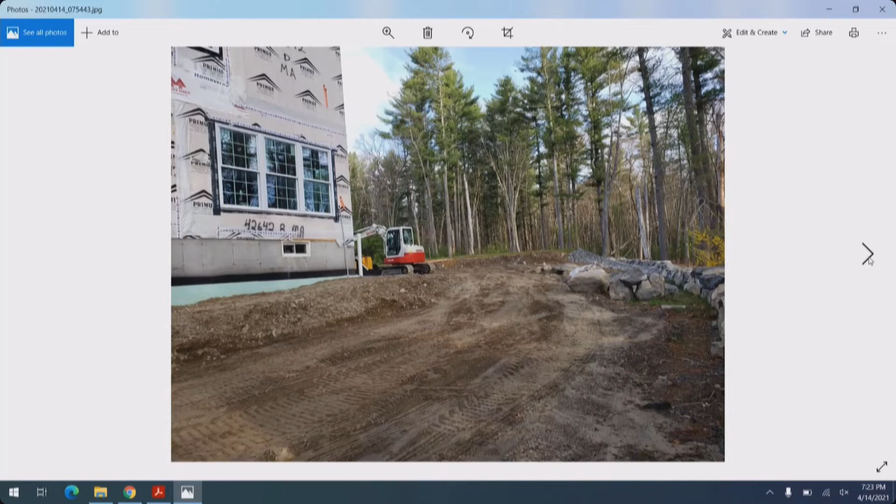I feel badly, but I think they need to get a good wetland scientist to give them an alternatives analysis on what it is they want to do. Jack? Yeah, I agree with a lot of what you guys said.

I mean, all of it, actually, especially the gas line. The patio and deck above the patio, you know, most of it being in the 75-foot no-build zone, that's got to be justified. The retaining walls out front, and especially looking at that picture, I don't see how they can get around those.

Those are out, though, out of the 75. The retaining walls and walkways are out of the 75. Oh, it looked like, maybe I misunderstood the plan, that they were shaded in gray. Can you go to the rear shot, the rear elevation - this one, if you don't mind? That's the front. There we go, that one's the best shot.

So they kind of got themselves in a pickle with the floor plan they picked, and got to the extent of building - it's not just a foundation, they've gotten to where they're at. So they've kind of hung their hat out there on getting a deck and a patio. At the absolute best they're gonna get - I'm not sure they're going to - but the absolute best is gonna be a deck and a rear stairway off the door. They may not get a patio. But I think, if they're that close and not outside the 75 with no other alternative, we may not even allow the deck.

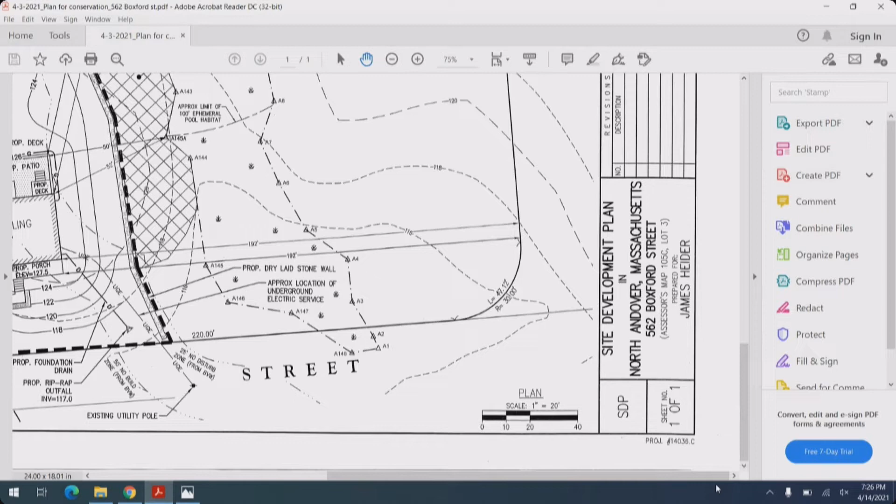He's an experienced engineer, he knows. All right, so why don't we... Christiansen and Sergi did the original, the first plan, and now Morin is on this plan. Now we have a second question. Is this still considered a modification or new filing?

So if that's the case, let's just simply say it's not a modification, let's deny the modification request. It's really not a modification. So do we want... that's a motion. I will second your motion for purpose of discussion.

Do we want, is Jim Heider or John Morin on the call with us? If anybody wants to get on the call with us now, that's fine, this is their hearing. Yes, this is Jim Heider, I'm here.

Hi, Jim, junior or senior? Actually, this is Jim Senior, and my son Jim Jr. is here as well. Okay, is John Morin on the call?

I don't believe he is. I'm not sure. That's okay. Jim, were you able to hear the discussion that we just had?

Yes, I did. First, thank you for taking the discussion to us tonight. And honestly, I wasn't aware of the original meetings and whatnot. My son purchased the house in hopes to put the new septic system in. Then we found out the house had to come down after we purchased it. And so we took the house down and put the new home in the approved area.

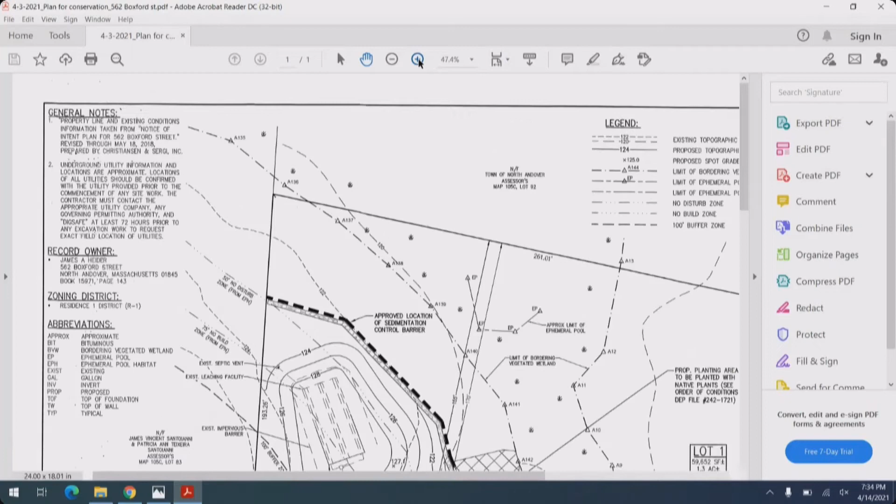That's the way I see it. I'm not usually inclined to be so liberal, but I recognize that a really robust alternatives analysis of the original application convinced us that the 52-foot setback made some sense in that one corner. We gave a permit, it must have made some sense. So I would say if we're looking at a patio or a deck, it can be no closer, absolutely no closer than 52. Al's saying no closer than 75, but I'm saying absolutely no closer than 52.

And if there's a way through their alternatives analysis they can justify that the deck is needed and it's elevated and therefore it's not very intrusive, that might be a valid argument, but the patio is gigantic. So I don't think there is an argument, other than I just want to have a really big patio. So I think in that instance you're probably—

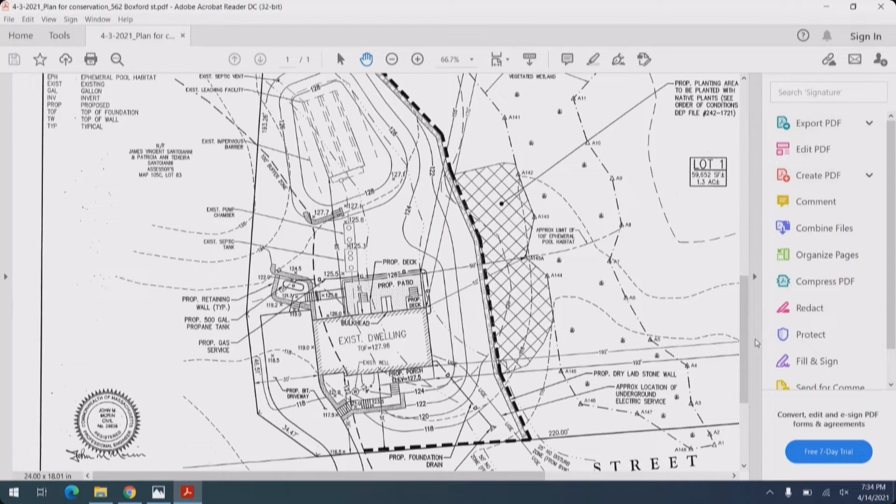And the patio is 50 feet setback. Yeah. So I think if I get 75 for the patio and the deck no closer than 52, that's middle ground I think John should explore, from my perspective. And I promise to keep an open mind. I do. I will keep an open mind.

So what are we asking them to do? An amendment, a new filing? An amendment, maybe. A modification, no. Possibly an amendment. I could live with an amendment. Jack, the alternatives analysis—well, that would come with it, yeah.

First we gotta give them the vehicle. How do we get to see what they filed for? How do they get that alternatives analysis to us? Through an amendment or through an NOI? Oh yeah, it has to have a way to get here. It's just a procedural question. I want to make sure, when you say amendment, it means abutter notification of a public hearing.

Reopen, yeah, we do. All right, good. This is, honestly, I'm sorry to do this, but no, it's fine, clearly not a modification. All right. But if they can get things as tight as possible, shrink that patio, get the porch out. Well, we're saying there's a way to make it permittable. We're not saying it's permittable yet. We're all offering our opinions and telling—okay. I said I'll keep an open mind, but that's John Morin's job.

The alternatives analysis has to be a good one. But silent in this discussion is the bulkhead, and I think that needs to be included in the discussion because it's an extension of the structure. There's no witness line of how far that is, but if it's 52 feet to the corner of the house, that bulkhead may not be 75 feet out, so that needs to be included. That may be tough to move if the foundation's poured.

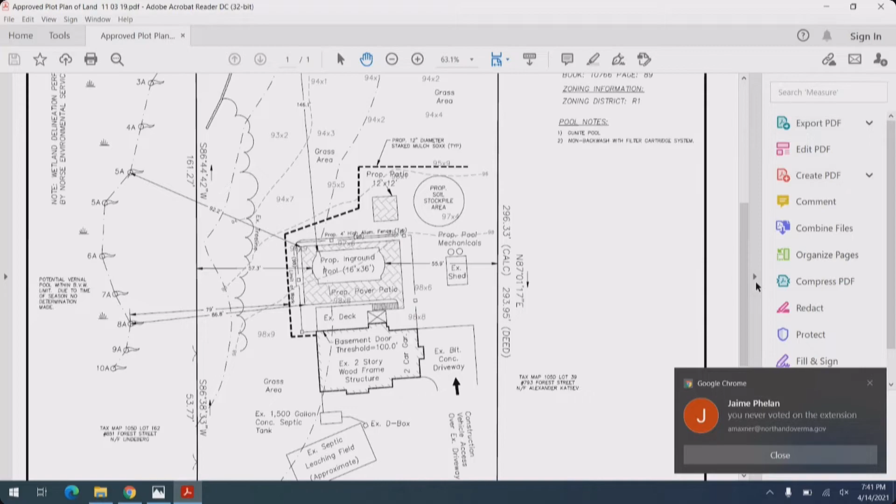Actually, can we just back up for a second? You never... I wrote it on, sorry, the extension. What's that now? Good job, Jaime. Thank you, Jaime. What did we not vote on?

The extension for 562 Boxford. In light of the fact that the existing order is going to expire prior to them probably filing the amendment, I move that we grant the one-year extension. Second. All those in favor say aye. Aye. Opposed? That's unanimous, thank you.

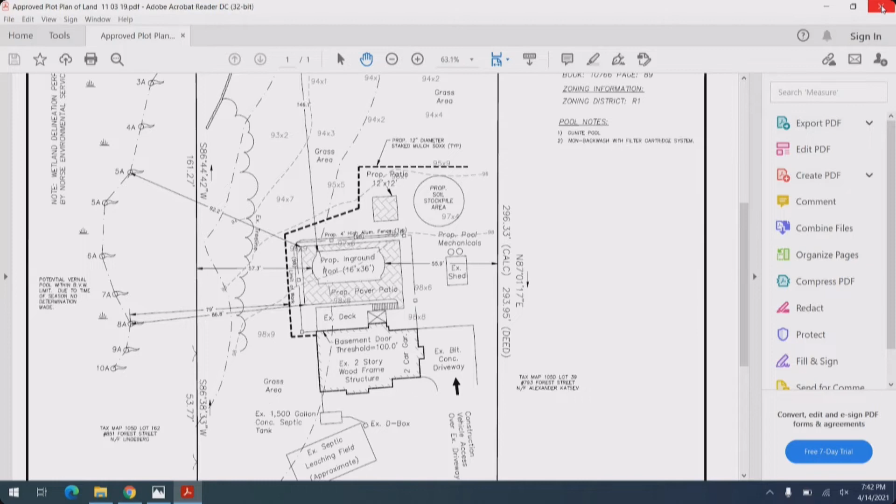Come as-built time, we found that the patio was expanded a little bit, up under the house. And the chain link fence was actually placed at the perimeter of the yard, so you can see that.

At the last meeting, the commission requested the applicant to go figure out whether this was a vernal pool or not. They hired Norse Environmental to do an investigation. They found 5 spring peeper egg masses and heard spring peeper and wood frog chorusing. So we have a vernal pool out there.

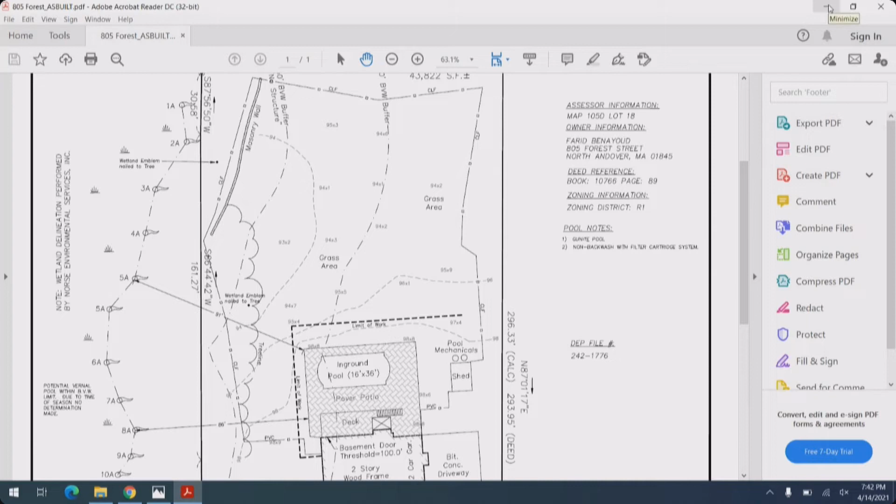I'll pull up her report. So we're at the point where we have a vernal pool with a chain link fence at the 25, which is in the 50-foot no disturb zone. Although part of the 50-foot no disturb zone is lawn.

So there's a chain link fence installed now at the 25? Not in it, but at it, inside the 50-foot, which is at the edge of lawn basically. Here's the pool - it's already installed. They want a certificate of compliance? Yes.

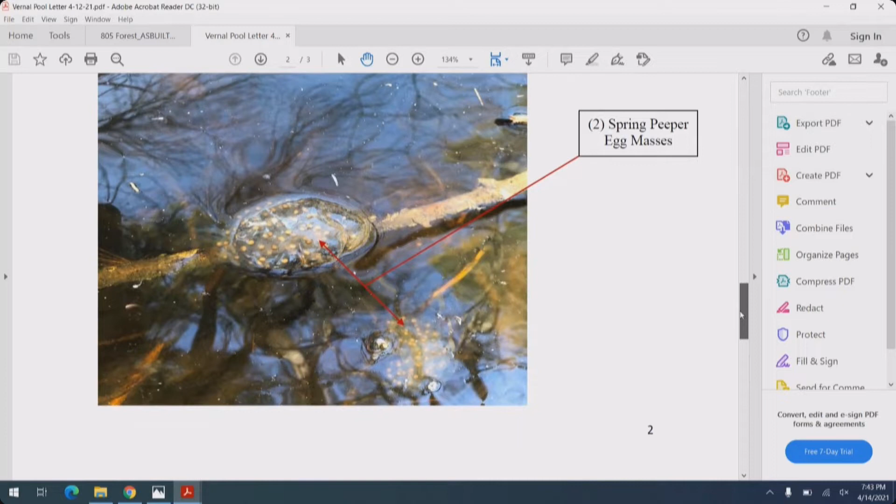Here's our spring peeper egg masses - that's pretty graphic right there. That's a great picture, actually.

Refresh my memory, because I want to make sure I get the sequence right. The original application was to build something which included the pool and the fence, and it was permitted with dimensions. Is this according to that plan, or is it not? It's different - the patio's a bit bigger, although most of it's out of the buffer, and some of it was in the buffer, expanded. And the fence was immediately around the patio.

So it was out of the 50, out of the 75. So is the pool itself in the correct location? Yes. The patio's a little bit bigger? Yes. So there was an originally permitted project that allowed it - the ephemeral pool was not as much of an issue back then.

Because it's not in compliance, they've got to build it in compliance with the order. The patio cut back and the fence goes around the patio, and everything else is in jurisdiction, and the ephemeral pool is sort of just another justification of why that's all appropriate. But the reality is, it's a certificate of compliance that they're asking for, and they're not in compliance, and they can't get a modification.

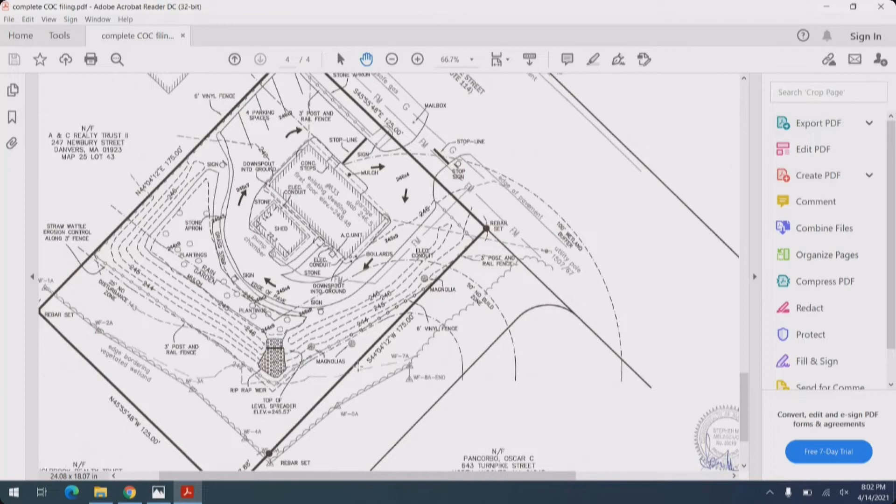Joe? No questions. Al? No questions. Jack? Motion? So moved. Second. All those in favor say aye. Aye. Opposed? That's unanimous. All set.

Next one is 628, partial COC request for 40 Meadowwood. This order was issued in November of 1992 and governed construction of an 18-lot subdivision and associated house lots. The Commission will recall issuing a partial certificate of compliance for 66 Meadowwood Road, and at that time we established that the roadway was accepted by the town and the drainage features were the town's responsibility.

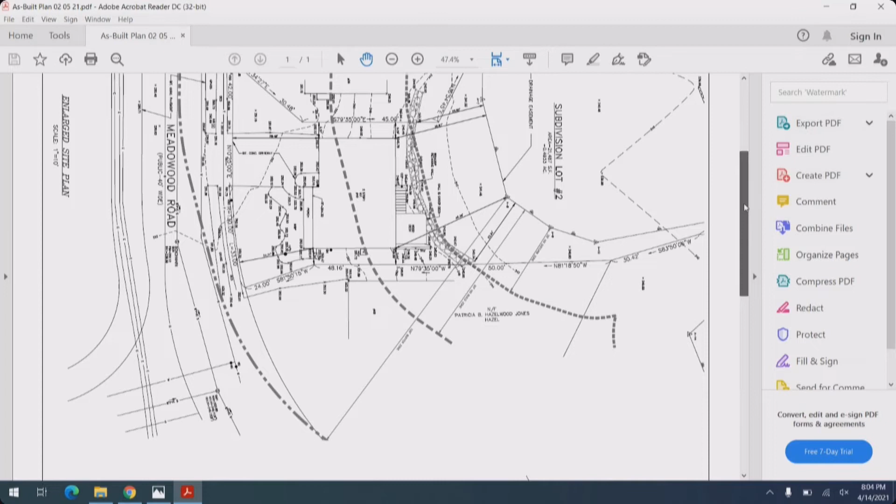This particular property has changed hands five times since 1993, and now this outstanding order is just now bubbling up, which happens. The certifying engineer notes that the rear retaining wall is located slightly into the 25-foot buffer in a couple of sections, but overall it maintains the 25. I conducted a site inspection and the site is totally stable. The retaining wall is stable, and I'm happy to report I didn't see any wetland violations back there, which I'm kind of surprised by, but things looked good. So other than a retaining wall that's been there since 1993 that's crept into the 25 a little bit - I don't know what you're gonna do about that now with the foundations and everything in - I don't have any issues with recommending issuing a partial certificate of compliance.

Joe: The barrier wall, is that made out of real rocks, or pebbles? It's rocks - no, it's boulders. All right, I'm all set then.

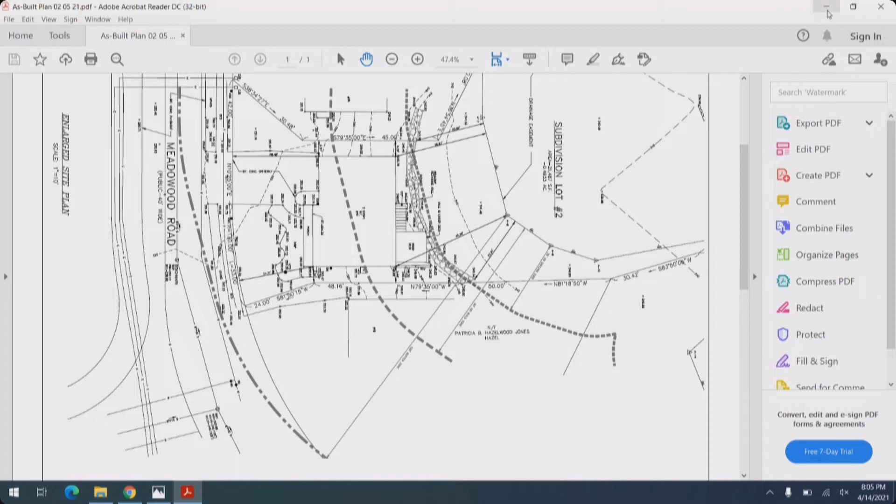Like I said, I saw all the plans here anyways. Well, I can give you some pictures. It's not that invasive to worry about, it's just that little bit of a corner.

This was a subdivision where we had to define a wall. Yeah, I know, this was one of those projects we paid our dues on. This was the first cluster, wasn't it? I don't know where it fell. It was the first time anybody had constructed a wall out of 1-inch pea stone. Right, but we called it a wall. But it was the first cluster zoned - first cluster in town. Oh, I see what you're saying. Yes, it was. No, I know it was a cluster.

In many ways, I have no questions. All right, Jack? I'm good. Motion? We grant a partial certificate of compliance for 40 Meadowwood. Second. All those in favor say aye. Aye. Opposed? That's unanimous.

Great, okay, next one: RDAs, NACC renewal for Rolling Ridge. Did we do 1774? Yeah, that was Riley, that was 114. Okay sorry, I'm lagging behind here, sorry. That's okay, alrighty, we're rusty, we haven't done this before.

This is a renewal of the small project permit, NACC number 93, for the Giving Garden operation at Rolling Ridge. Our field inspector performed a site inspection with Fran Fink of the South Church Giving Garden and reports the following: a produce washing station previously approved by the Conservation Commission was installed in the garden by an Eagle Scout in the location it was supposed to be.

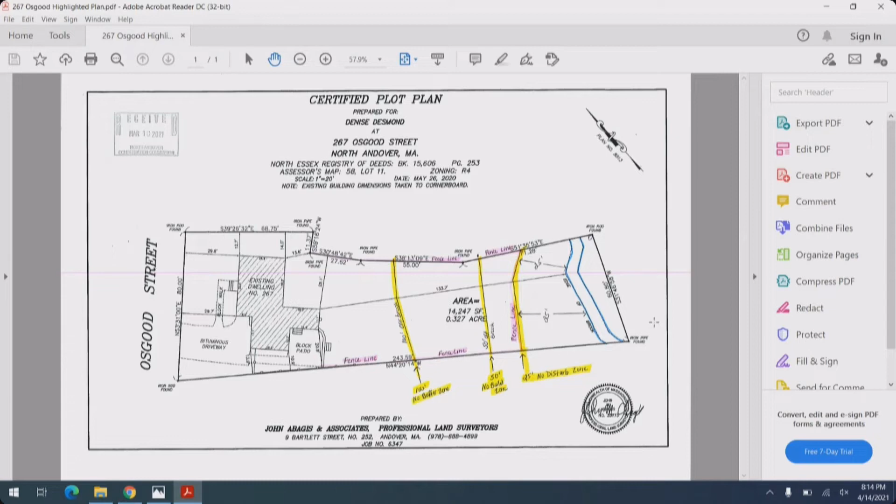Thank you, Amy. Joe, just a couple of things. The fence is vinyl, raised up off the ground to allow critters to move through. No gates? It didn't say, I don't think.

Let me say so, not in the form of a question: there will be no gates. And as far as removal of soil from the site, I think broadcasting the soil, upgradient of the fence line, is an appropriate way of distributing it.

And if they don't want to do that, they can remove it from site. That's it? The only thing I have to say is this project, the applicant is very cooperative, so I have no problem with the project. The only thing we should think about is maybe putting some placards on the fence.

Al, I have no questions, actually. Jack? Upon the plantings, it's a vinyl fence. If we recommend a seed mix, it would have to be a shady seed mix, shade tolerant for sure.

You're trying to establish an herbaceous layer as well as a shrub layer? What's out there now, just trees, right? They've offered to do either just native seed or a combination of native seeding and shrub layer, all native, because the area is bare, filtered sunlight, mostly Norway maples back there.

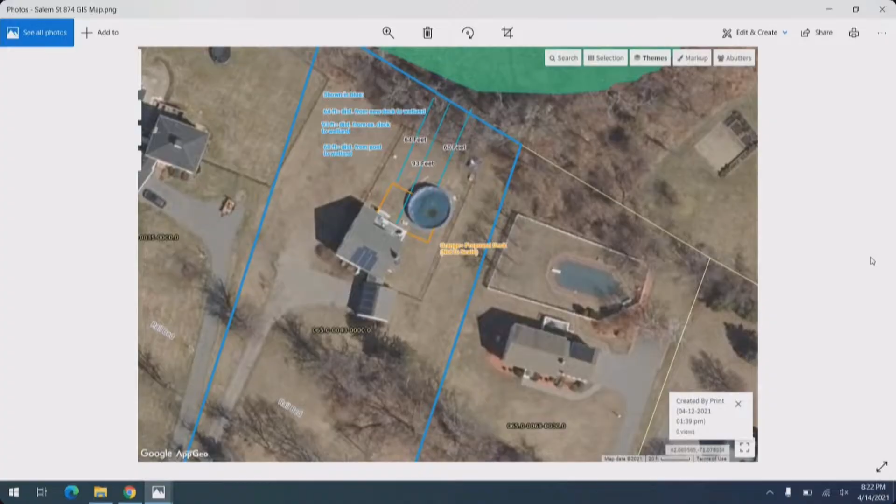Okay, I need a motion. Conditions - what are the conditions? Pre-construction inspection with erosion controls, excavated soils out, post-construction inspection, and remove shed by hand. I move that we issue the negative 3 with those conditions. Second? All those in favor say aye. Aye. Opposed? That's unanimous.

Next one is 428 Winter Street. Alrighty.

This is for an in-kind replacement of an existing collapsed 14 by 16 deck and stairs, installation of 7 new concrete footings, and replacement of rotting sheeting on the home. All materials will be disposed of in a dumpster placed in the driveway. Erosion controls will be installed between the work and the 25. Conservation Department staff took measurements and confirmed the deck is approximately 42 feet from the edge of the BVW at its closest point.

The applicant has requested a waiver to rebuild the deck in its current location due to the access, egress, and architecture of the house - moving it is cost prohibitive and won't work anywhere else. Conservation Commission approved the septic system upgrade in the 50-foot buffer in 2000, and the plans at that time showed the existing deck, so it's been there since 2000. A certificate of compliance for that project was issued in 2001.

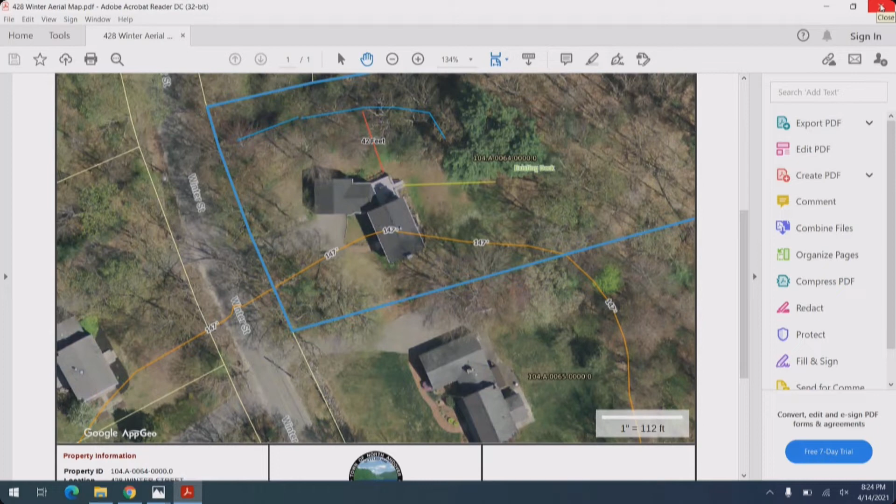Joe: So the footprint is the same? Exact same - I can pull up the plan. No, I believe you. My question is, since this is an RDA, there's no as-built ever required, right? So what level of satisfaction should we expect - does the building inspector require a certified plot plan? No, but they do post-construction inspections and measurements, which we can do too. I would add that requirement, even though you wouldn't typically do it on an RDA, but since this is theoretically a waiver on an RDA, I think we need it. Okay.

I'm all set. Al? All set, thank you. Jack? All set. Motion? Move negative number 3 with conditions as discussed, so moved. Second. All those in favor say aye. Aye. Opposed? That's unanimous.

I don't know if Sean's on yet. No, I'm sure he'll chime in. How about our Eagle Scout? I just texted him - actually it's a her. She's meeting with her troop committee now, so we can push her off till later as long as she gets in tonight. I'm her mom, listening in to make sure she'll be heard tonight, but she's definitely presenting to another group right now. Okay, very good, thank you for the update. You're welcome, thank you.

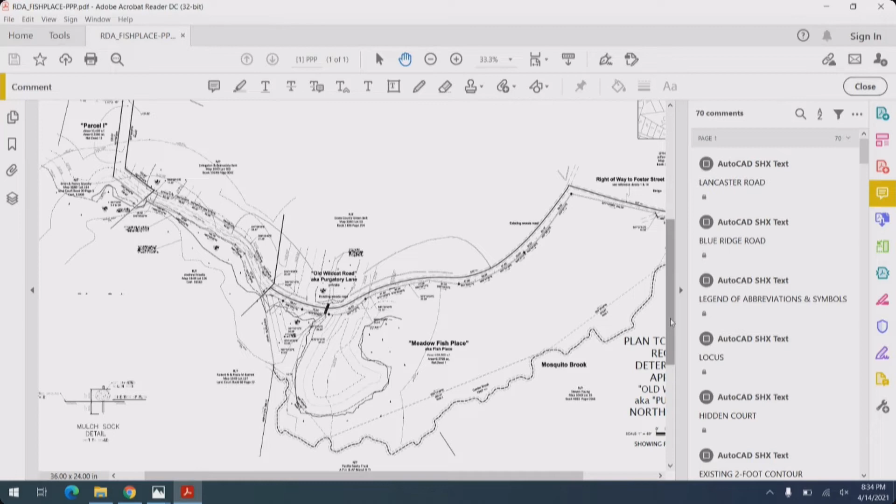So I would recommend closing the hearing and issuing a negative determination, citing that the work does not require an NOI, as it meets the agricultural exemption under 310 CMR 10.04B3. I would also recommend a pre-construction site inspection to observe and direct erosion control installation, and then a post-construction inspection to verify compliance and erosion control install.

Yes, we walked to it, and there's a very large granite capstone, your typical very old culvert, mainly large chunks of granite put together like Legos. And you can see right through the top. Over the years, some minor repairs have been made, but it's to the point now where a major repair is required that would be very, very cost prohibitive.

It's important to note too that the access off Lancaster Road hasn't been used for maybe 2 to 3 years, so there are some small shrubs and it'd be difficult to drive through there now. But prior to coming in off Foster, the Lancaster side was a main access point used not just by Mr. Manzi, but by Earl Foster and Archie Foster before him. Then when Lancaster Road went in, it got a little bit more busy and was no longer the preferred route, since it was difficult to drive a hay rig through the subdivision roadway system.

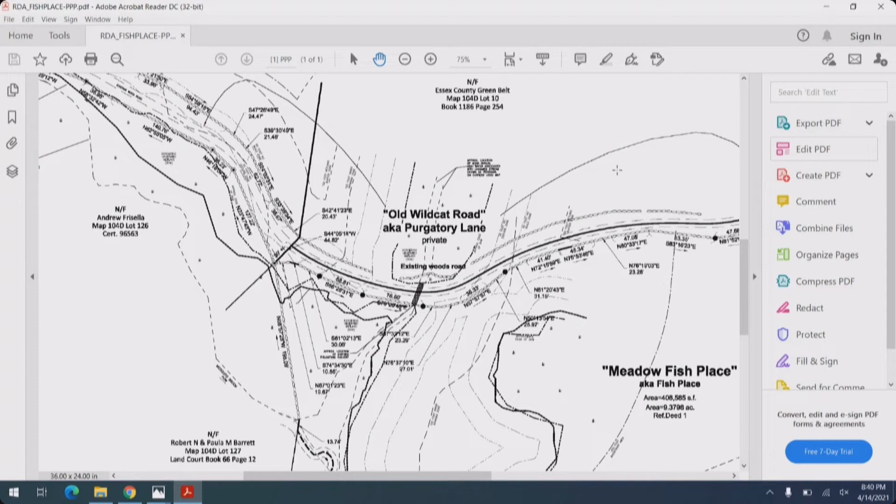No, I don't have any other questions. So, Lou, we do have comments from a couple of abutters.

Fire away. This was received at 5:30 this afternoon from Paula Barrett. Will Lancaster Road become a second entrance in and out? And if so, why do we need a second access? How long will it take for the proposed work to be completed, and how much noise will there be?

Will there be controls to the start and stop times of the proposed work to lessen disruption? Her main concern is to make sure that any change happening to the land does not compound a situation she already has. She's lived there for 37 years, and she is now getting a good amount of water coming into the right side of her backyard past the tree zone, and she wants to make sure any changes to the land will not make this worse.

We have 2 beaver huts behind the Frisella property that she's told nothing can be done to remove. Some trees have died because of the water seeping. She would like everyone to be clear that you need to make sure this and any further thoughts on changing the area to anything other than agricultural use could cause serious property damage to the surrounding abutters.

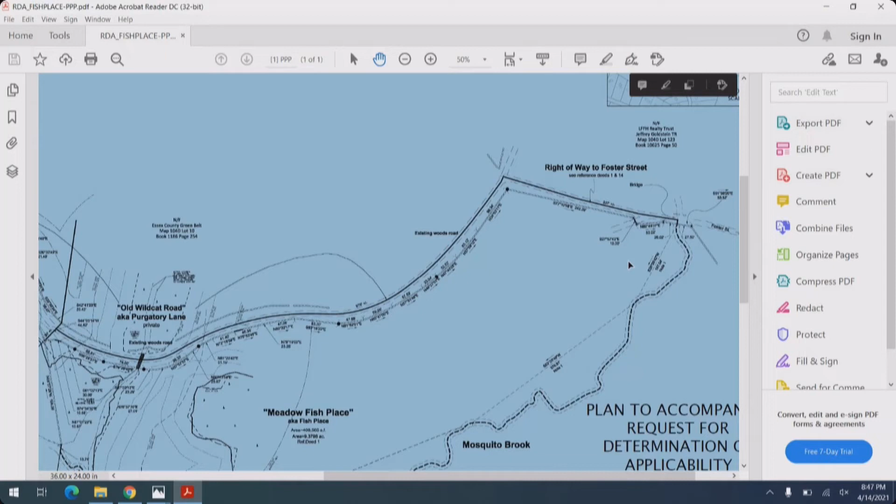Fishbrook? So we're not substantially higher than the brook for most of the length of the road, but we're definitely higher by feet, with the exception of the first crossing, which is just a wetland crossing where there's a small culvert that drains a BVW on the north side of Wildcat Road.

So the reason I asked the question the way I did is that even grading the roadway, we're not increasing or otherwise further impounding the water upstream. As long as that culvert and the beaver deceiver are functioning, it's going to provide the same level of protection that it has for years. And this work has no impact at all. That's correct. All right.

I've lived here for 37 years, and I am now getting a good amount of water coming into the right side of my backyard past the tree zone, and I want to make sure that any changes to the land will not make it worse. We have two beaver huts behind the Frisella property, and I've been told nothing can be done to remove them. Some trees have died because of this water seeping.

I'm not surprised, I've seen that slow creep of water along this reach of Mosquito Brook, and as I mentioned before, this project is not proposed to fill floodplain. And as Commissioner Lynch pointed out, as long as that beaver deceiver keeps working, which there's no proposed changes to, the water level should remain as is, unless beavers create more dams, which is highly likely.

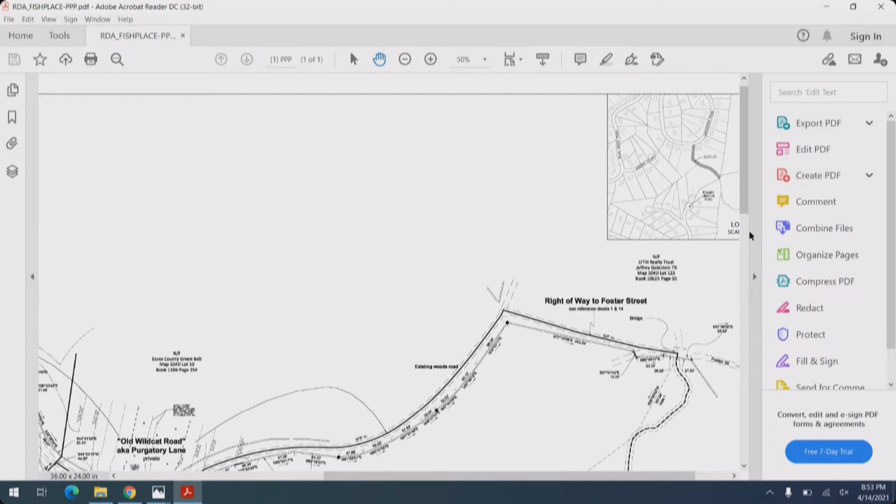If people wanna walk it and it's the right of way, I suppose they can walk it. I believe the Foster Street side is an easement. I'm not sure that the actual Wildcat Road goes all the way through to Foster. Let me just look at that plan real quick. Yeah, it turns into an easement, right of way to Foster Street, see reference deeds. Yeah, I believe that's just an easement and not part of Wildcat Road.

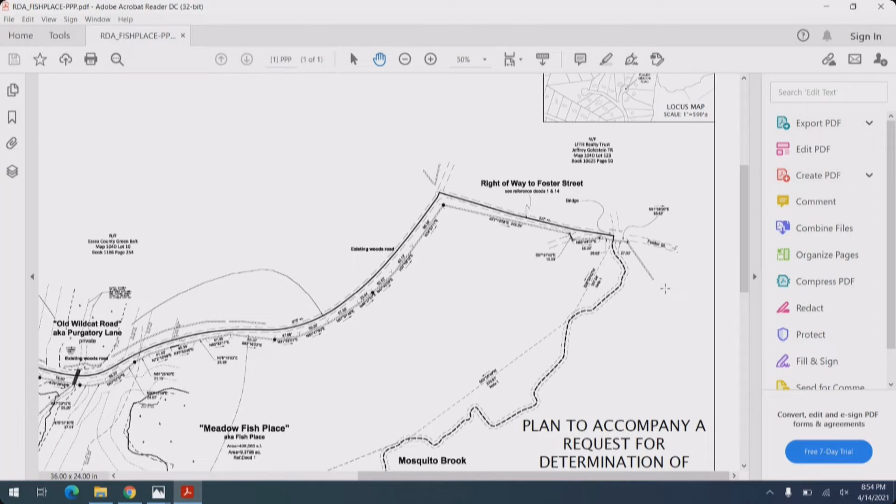And the easement runs in favor to who and for what purpose, do you know? Mr. Manzi, to access - so he can control access there, yes, because it's an easement to his right. So I guess I ask, I'm not sure if you can speak on authority from him, is it his intention or desire to chain it, cable it, or gate it in some fashion? Well, there is a gate on that side now. When you come in off Foster Street, there's a driveway, and when you drive down it, there's another driveway off to the right. There's a gate there now. And he intends to leave it there? I believe so. So I think that addresses his concern adequately.

We're talking about the other side. Doesn't matter, if you can get through, it's a long dead end. Well, we're talking about people walking it or riding their bikes on it. I don't think we can restrict that. Can we? I don't think we can. I think the property owner who has that easement can do what he wishes, but his concern was whether vehicles would be able to drive through in a through fashion, and I don't think that's the case from what I just learned.

Greg, I do have a technical question on the culvert itself. You spoke about, and I've seen these old culverts all over the place, just rubble, stone slabs stacked on the side, and stone slabs spanning the crossing with voids in between them. You're also proposing to improve the road in that area by filling and grading there as well? No, no. This work would stop short.

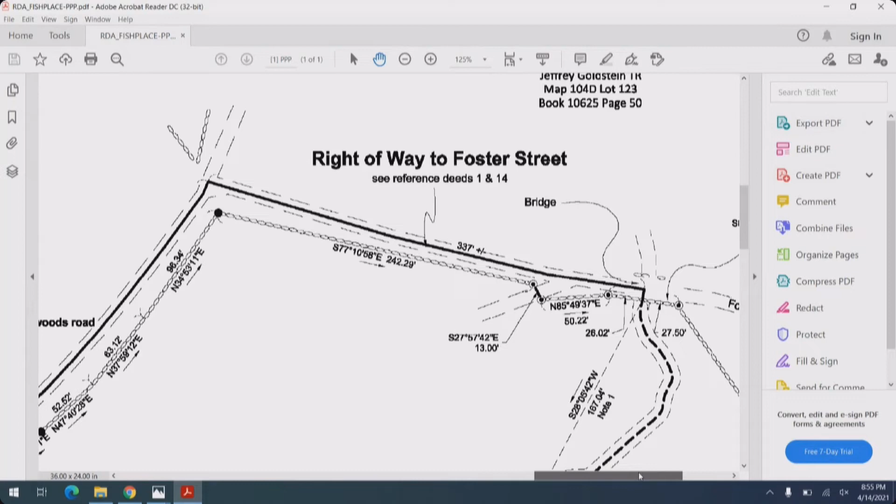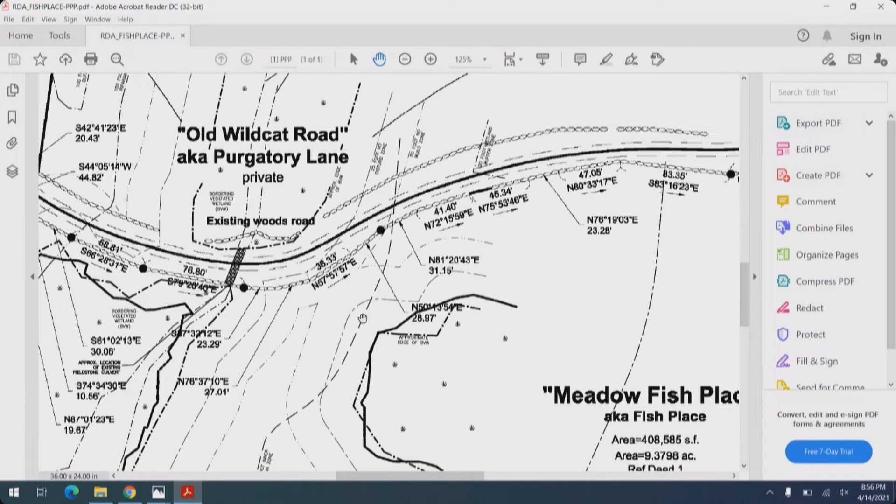Let me see - if you pan right after that dark rectangular culvert that's perpendicular to the roadway. I see it, yep. Just to the right of that, there's an opening in the stone wall, and that's the farm field. That's where the work would stop. So there's no concern for any of this work being proposed damaging the stone slabs, it's going to stop short of that? It's going to stop probably 500 feet short of that.

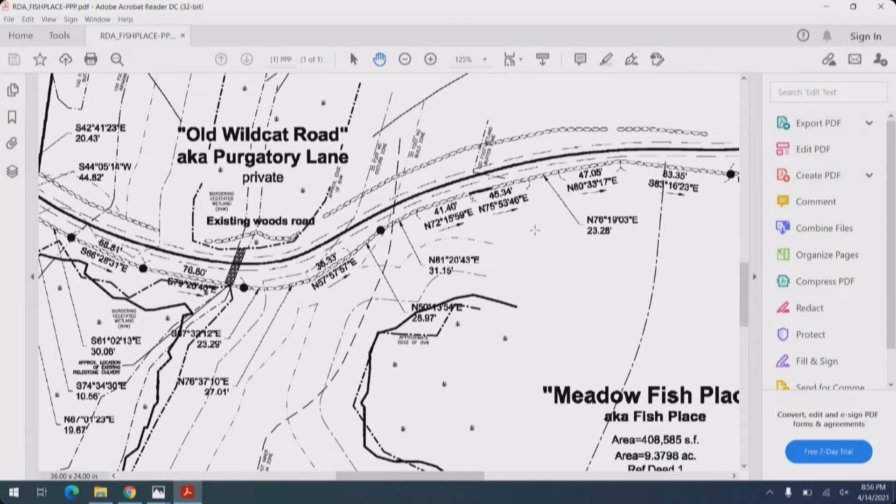Thank you, I'm all set. Jack, any more questions? Nope. Sean still out there? Any more abutters? Nope. Okay, motion - Sean still out there? Oh Sean, I'm sorry. No, I'm here. Can you hear me? Yes, I can. Okay, I'm good. You're good? Okay, would you like to make the motion, seeing you're on the phone?

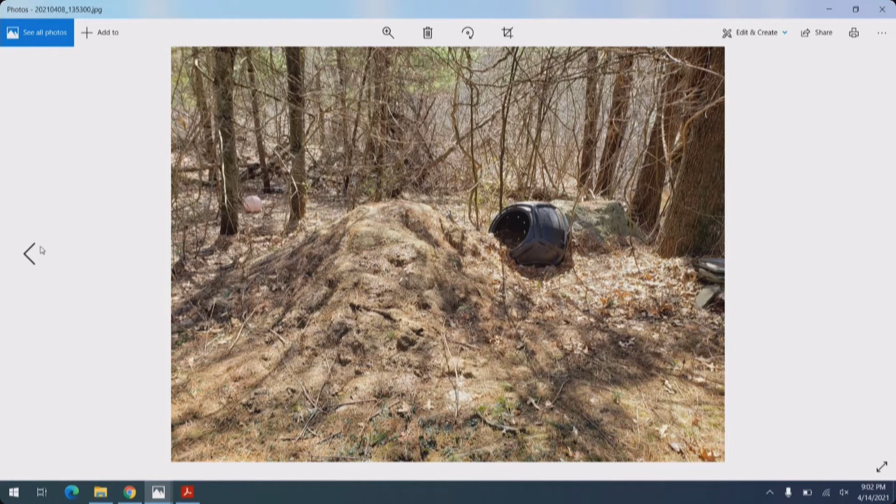How could this be an RDA? Well, am I wrong on my math? If I'm at a 14-foot drop-off in 50 feet, let me get... it's 28%. Like right there.

Here's the knoll, and the pool is going to go right in here, so it's got to level out a little bit here. A little? 10 feet. But honestly, they're going to take 10 feet. Okay, that picture helps me.

Let's go back to the plan. Because I guess the plan, and you did enhance the topo so I could see it better. I was thinking that was like a cross slope, but you're saying it's like a knoll, a finger-like projection. Yeah. All right, so if you don't mind, let me just trace this line around.

It's like 92 to 86. So it's a 6-foot drop, that's a 12% slope down to the wetland line, 12%, nowhere near the 28. But 92, you can see right here.

So I guess the question is, with that kind of slope right on the edge of the pool, with leveling that has to be done, I don't even see any erosion controls proposed. At the very least, they need to propose erosion controls. There's gonna need to be fill brought in to fill up that area to the edge, and then how do you propose to slope, grade, and stabilize it before it's done.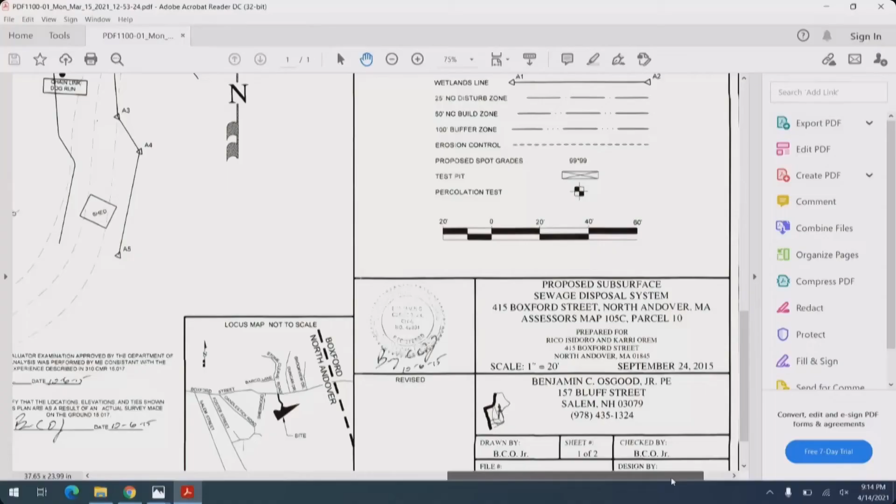I think if he spins the pool up closer to the driveway, that would help him with a lot of excavation work also. People want it behind their deck and off the driveway. I want your pool, your deck, you want a lot of things too, but when he gets his as-built plan discussed with his engineer, those kinds of conversations can happen. I don't know if you can get a 36 in there, but there's a possibility to spin that pool up closer to your driveway or toward the end of the deck.

Don't lose sight of the fact you have a separate A-series wetland to the right there, so you don't want to get too close to that either. The 50 is way down here from that, but then the other 50 is right there, you could actually start getting close over here, so you gotta be real careful.

Could I ask one more question, and I promise I won't ask another one after that? If I spin it up to the northeast towards the driveway, I'm going to be above my water line for my well, and I know that's probably 5 or 6 feet down. Is that going to make an issue if it's above that water line?

You mean leave your water line beneath your pool? Well, that's what I'm saying. Yeah, you don't want to do that, that's the only way to spin it. I can't spin it up to the northeast because the water line for the well is right there. I think working within the confines of where you are and keeping that water line away from your pool is what you want to do. That's what I thought, but I just wanted to clarify.

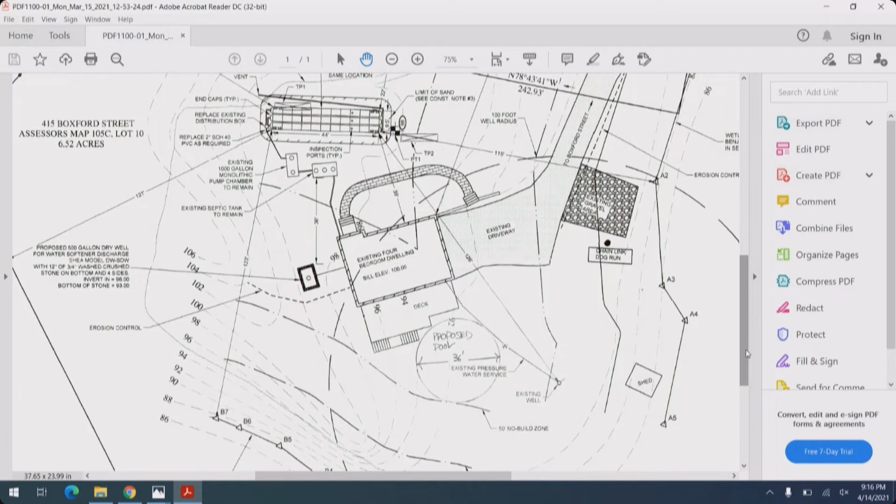So again, without complicating it, since you need to have an engineer do an as-built plan, that person is going to be able to show the most optimum pool location and what he will likely believe is approvable under an RDA. I recommend you follow that route, because it's going to answer all of these hypothetical questions. Okay, thank you, I apologize for that. I appreciate it.

All right, so we need a motion. I would move that we continue. Second. To the 28th? Yes. All right, so Mr. Young, we're going to continue till April 28th.

And then I can give you contact information for the design engineer on record, that might be a good place to start. He's relocated from that address and different company, you know that. Yep, all right, so we have a motion and a second.

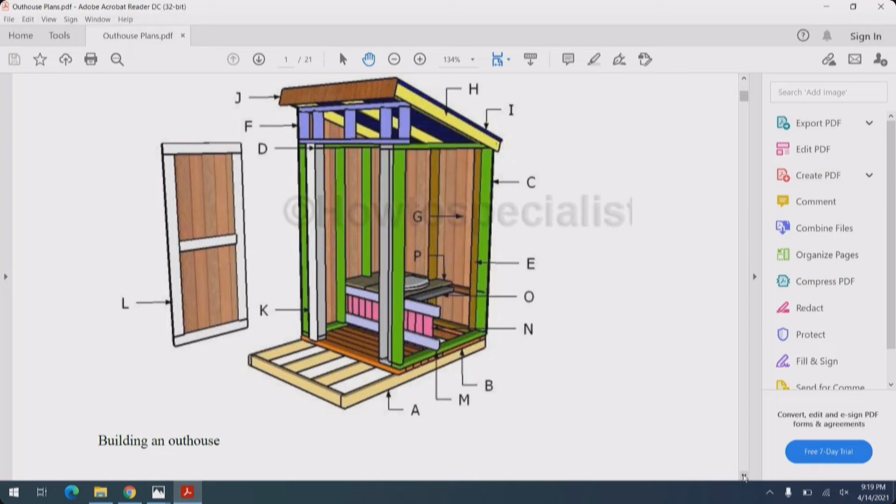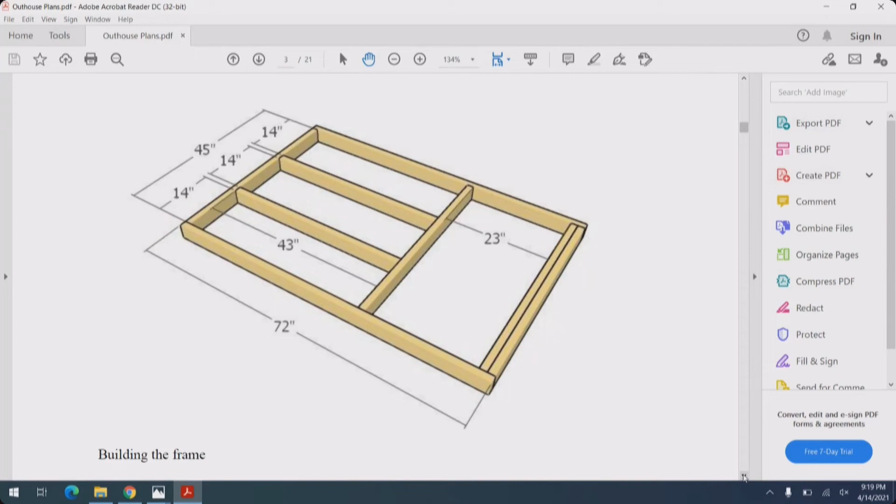This is the plans for it, we got it online. The composting toilet itself is a contained system, it's not like a hole in the ground or anything. It uses coconut coir to compost everything, making sure it doesn't smell much.

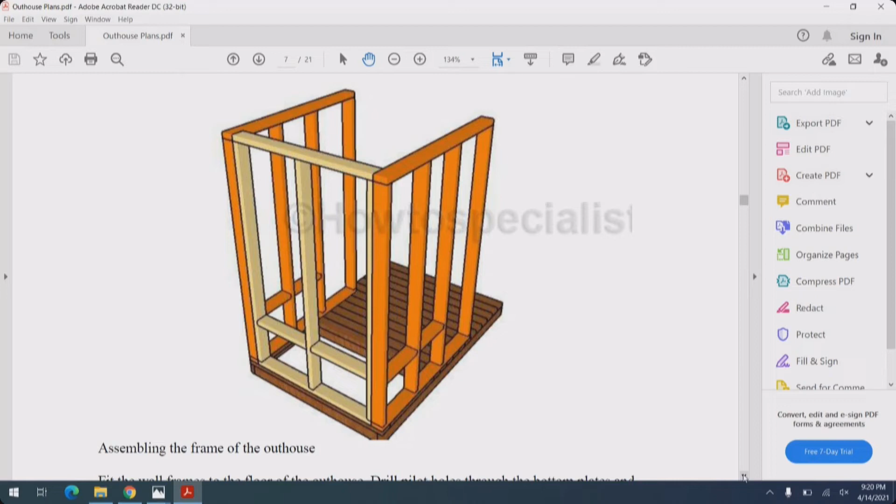What system, is that a Clivus system? No, this is like a Nature's Head toilet. It's completely closed off, self-contained. It separates the liquid and solid waste, so no sewage is made. It uses air to compost, but you also need a little fan to keep the smell from happening.

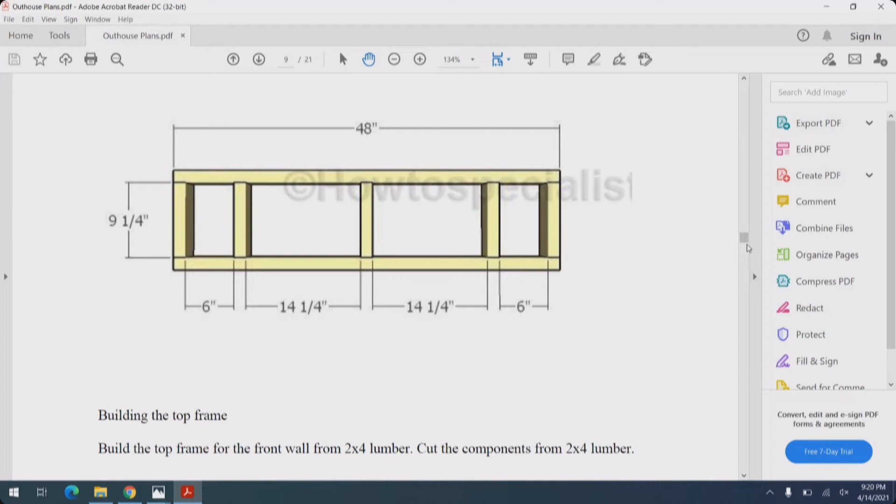So we've got a little solar panel in our garage that we're going to install on top of it, so it gets the small amount of energy it needs to keep it from being smelly and help it compost faster. That's what the fan is for. So it's not supposed to be smelly because there's no sewage, right? Exactly, no sewage.

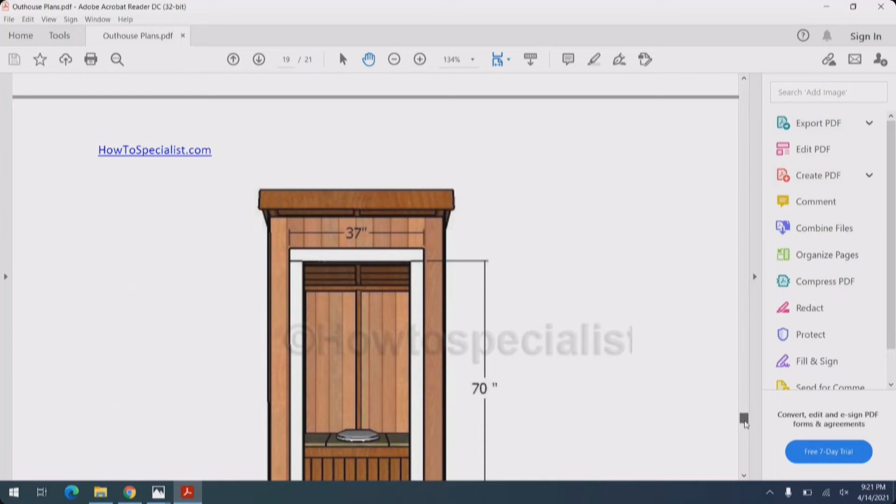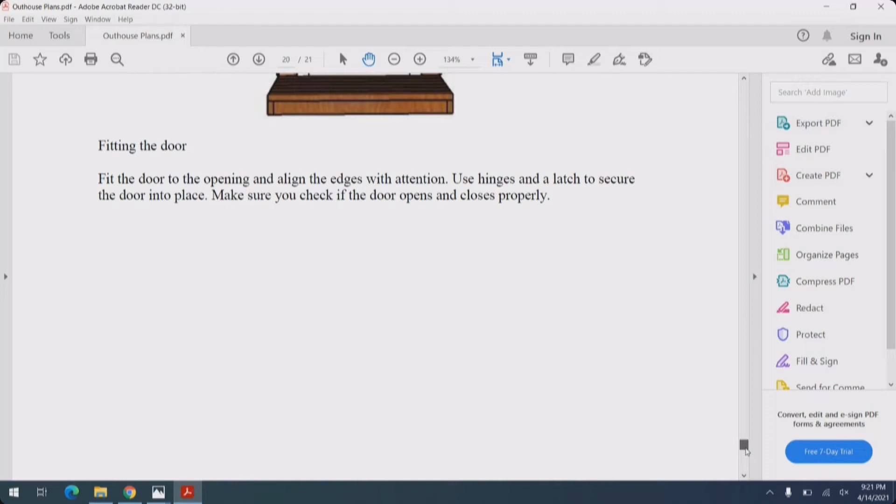How does it get maintained, does it have to get pumped out? Nope, I want the candidate to describe that since it sounds like you've done some research. So it's like bins, supposed to be emptied after about 90 uses, that's the max amount. The way it separates it is you have this little latch you open when you pee and close it, and there's a bin you just take out and can dispose of.

I think what you would suggest is that you fill it up half with water to dilute it more, so it's not just pee, and then you can dispose of it somewhere. We've been told don't dispose of it in the composting area at the garden, because then that compost won't really be food safe, even though the company says it would be, just to be sure, we don't trust them.

We don't trust them, so you can get a second bin to take it away. And this thing is really not used much. Yeah, it's not. It's used by one of our volunteers extensively.

So I'm thinking that the number 2 would have to be just seasonally maintained, and if it's ever used, and then the number 1 would have to be maybe twice a season maintained. It does say you should empty it out before freezing temperatures, of course, so someone has to winterize it and take it out. That is a picture of an example someone made. That one's in the desert somewhere, so it's not quite the same, but it does have the same toilet and it's completely closed.

So Marie, I'm a civil engineer, and unfortunately I know way too much about sewage, composting, and human waste. But it's a well-thought-out project, and typical of Eagle Scout projects that are very ambitious, as this one is. Building it and getting it off the ground at the outset is a pretty daunting task as a candidate, but the real functionality of it is making sure there's an operator's manual that stays with the facility, so folks using this forevermore know what to do and how to manage it properly. Have you prepared such a manual?

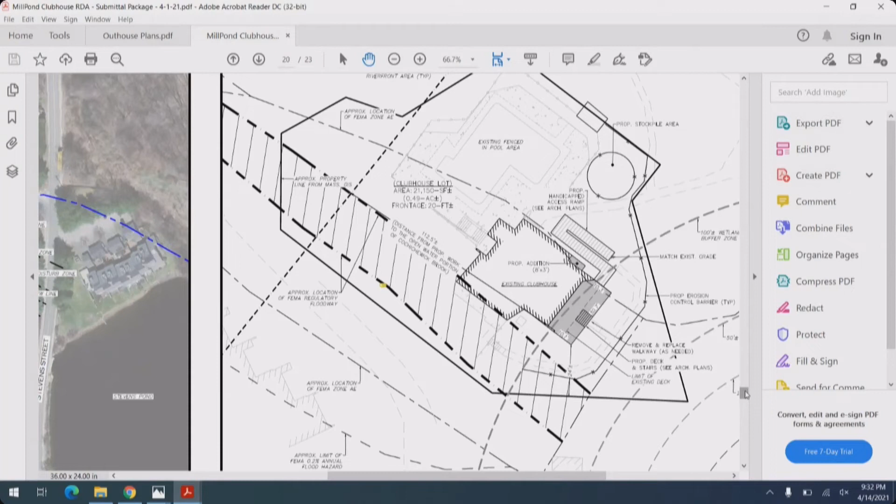They're putting the ADA ramp in, they want to make sure there's continued accessibility off the bottom of the ramp around. Right.

Here's the plan view. Do you guys, you're the design engineer for civil, or you're the project manager? I'm sorry, what was your role? Is it Andy? Andy, what's your role with the project? I'm sorry, you're really breaking up. Yeah, what I was asking is your role, project manager, construction manager, are you the engineer, civil engineer for the project?

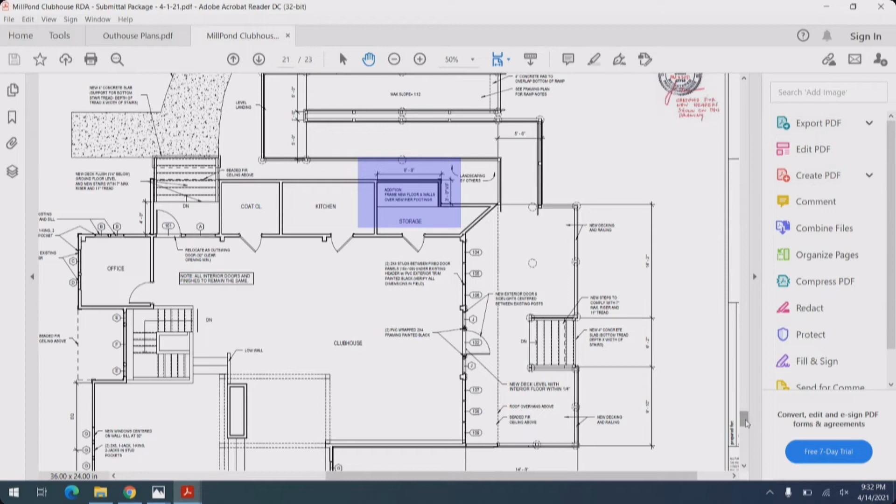I think I got you, but I'm the civil engineer, yeah, for Mill Pond Townhomes. They have a separate architect involved for the thing you're looking at now, and I'm the engineer of record.

So as the civil engineer, that's why I'm asking the question the way I am, is that when you're adding impervious area on a non-single family residential building, we're going to ask for some sort of stormwater improvements in collecting the runoff from that additional impervious area. Right now we don't see anything proposed, so I'm asking that if we continue this, I'd like you to bring that to the next meeting for us to see. Okay?

I apologize, I'm having trouble hearing you. I think we're talking about stormwater management off the walkways. Honestly, the preference would be to just have this approved, or get a negative determination, take the walkways out of it, and they come back and deal with the walkways after. They're anxious to get going on the clubhouse work, with the walkways being secondary.

I'm sure they could put some sort of drip edge or stone along the sidewalks, and I'm sure they'd be open to that. But if it's going to delay a possible determination, the preference would be to deal with that at a later date.

So you're withdrawing the request for paved sidewalks and leaving what's there in place? If the choice is between continuing to another meeting or not, then yes, that's removed. We'll leave the sidewalks as is and return to this commission to deal with the sidewalk.

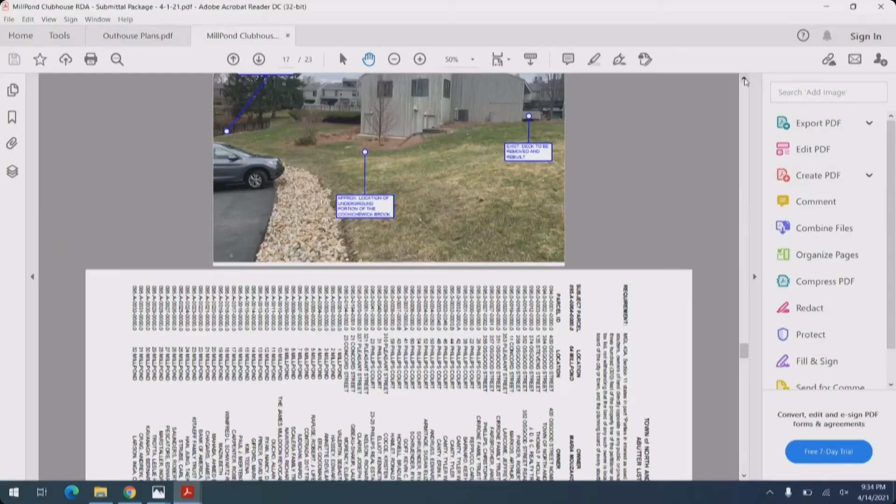Thank you, that's all. Actually, slide back a bit further, that other picture just below the one we're looking at. Look at that, we get stone on the edge of the parking lot. That's what I'm talking about, at the edge of the sidewalk. If you're looking to do this rather than withdraw the sidewalk, if you can put a drip edge along the down gradient side of the walk, it's probably adequate.

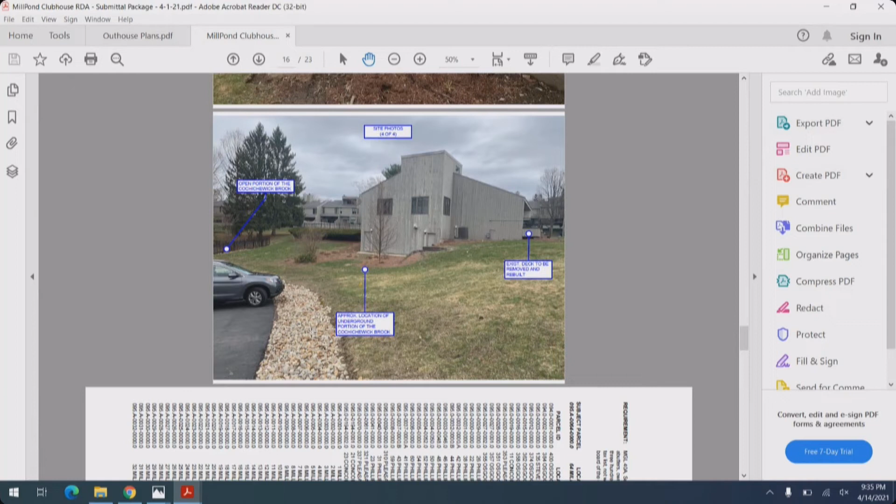Yeah, I was certainly willing to do that. We were just talking about that being dealt with at a second meeting, but we can certainly do that now. That could be a condition. So if you're agreeing to put stone down tonight, we'll condition it as such, and this moves forward as an RDA with the sidewalk. That'd be fine. Yep.

I'm all set, no questions. Okay, motion? Joe? Is this -3 or 5? -3, so moved, with conditions, including the drip edge on the down gradient side of the paved sidewalk, pre and post, and removal of the soils.

That works, that works. Joe moved, Al seconded? Did Al second? Yes, I seconded, I'm just along for the ride. I'll second it, that's fine. All right, all in favor?

Aye, aye, aye. Sorry, I just want to interject here, don't forget, more than 3 conditions makes it an NOI. Well, not always, depending on how severe the conditions are. We were getting close. Pre and post is one condition, that's right.

Tonight it is. Lou, it's like the old days when you went to the track. Shootout at the OK Corral. I think we're all set. You can't go to a wedding if you didn't go to the funeral.

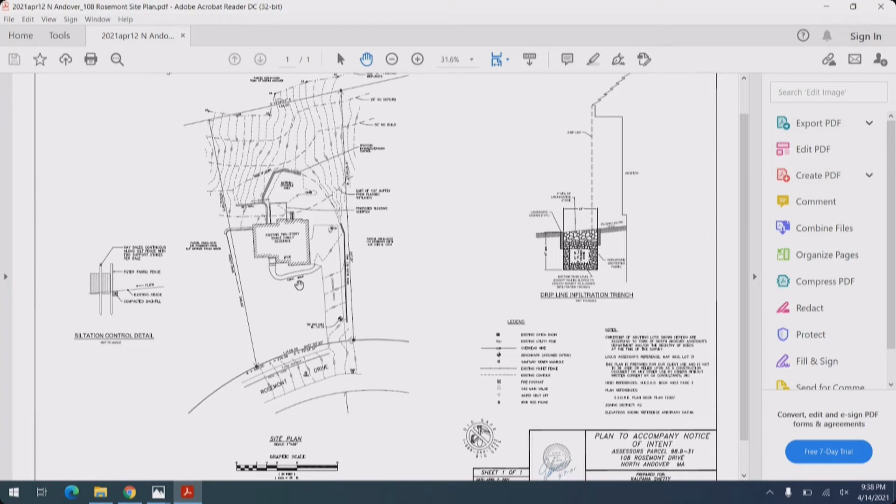Also, we wanted to wait for snow cover to melt so I could actually review the wetland line. Was able to do that, and I feel comfortable with the wetland as delineated. Took a couple soil samples, upgraded it. We've got some hydric soil, so I'm good with the line. So you guys can see the proposed addition off the back of the house with stairs, and this is actually about 85 feet from the edge of BVW at its closest point.

I don't have any more to report because I think we have what we need.

Go down a little more. I just want to see the driveway - no, the other one. Okay, there's the drive. Is that the driveway on the right? Yep. So that's your construction access? Yeah, absolutely, there's no other way.

Do you think there's a need to extend the erosion controls a little further to the right as we're looking at this? Well, if the construction activity comes off the construction access, off the end of the driveway - we got a slope up here. It's an upslope? It's upslope, yep. Okay, thank you, I'm all set.

So I don't think... we might want to protect that catch basin. It's really actually a little plastic grate, not really a metal thing. It's probably a yard drain of some sort.

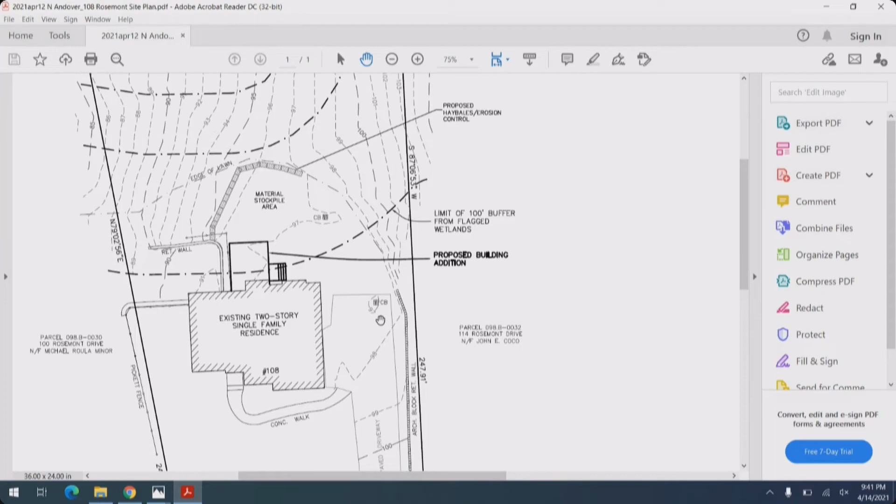But Mike Seecamp is with us this evening - that's uphill, so if you have questions for Mike, he's with us. Yeah, it is, it's uphill. They're probably just infiltrators they put in just to catch stuff coming down the hill and coming down the driveway.

So if you guys are good, I'd recommend closing the hearing and issuing in 21 days. I'll draft up a decision for next meeting. Any questions, Joe? Is it Mike or Pat?

Oh, that's Mike. Hi, Mike, it's Joe. How you doing? The two catch basins we're talking about - there's one at the end of the driveway and there's one in the rear yard. Do you know anything about those? Were they on the original subdivision plan or original house construction? I do not, and I asked the engineer and he said he did not know where they daylight. It's likely that they daylight over to the left of the rear of the house, where you see a patio area. I suspect they come out over there somewhere, not toward the wetland. It wouldn't flow that way anyway - that would be uphill, and the natural flow is down slope.

Mike, since we don't know what purpose they serve and where they go, I think if we were to ask that they be protected during construction - silt sacks, or maybe just put a barrier around them with hay bales, a circle of hay bales. Sure, yeah, okay, that's all I have. Thank you, okay.

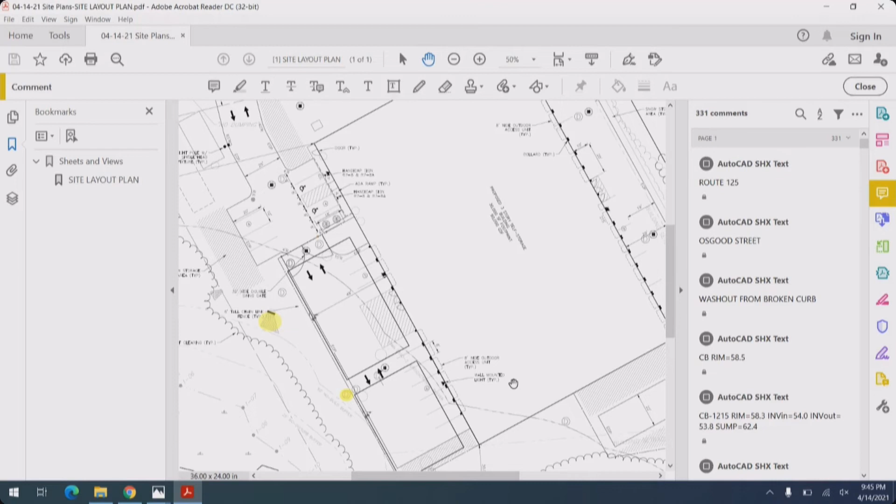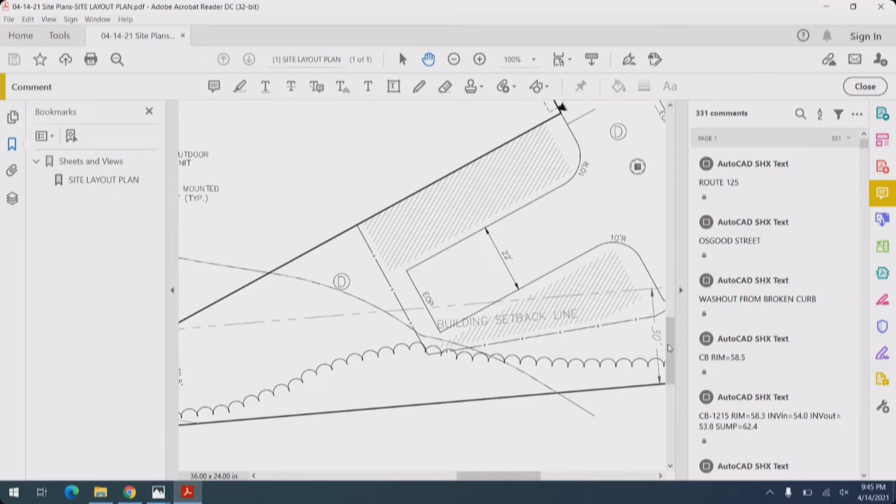I don't know, can you see that? I cannot. Jeez, I'm sorry. Oh yeah, you had it a minute ago. There we go, all right, I just gotta get really, all right, there we go. Okay, so crosshatch area here, a couple crosshatch areas there, and then some over up here.

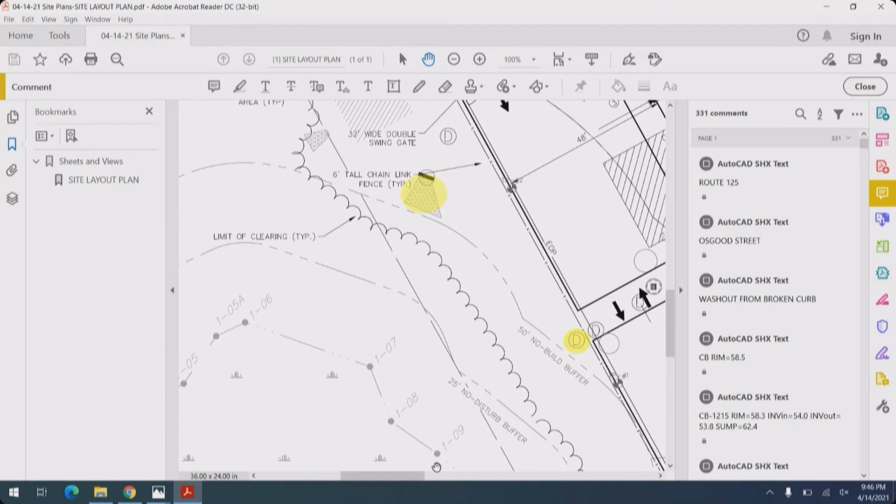These highlighted areas, Amy, could you go back to that second snow stockpile? It's like a little dead end, 22 foot wide, right here. I'll let Louis look at that as a snowplow aficionado. Where's the snow gonna go? Right to the end. It's not gonna get to either side.

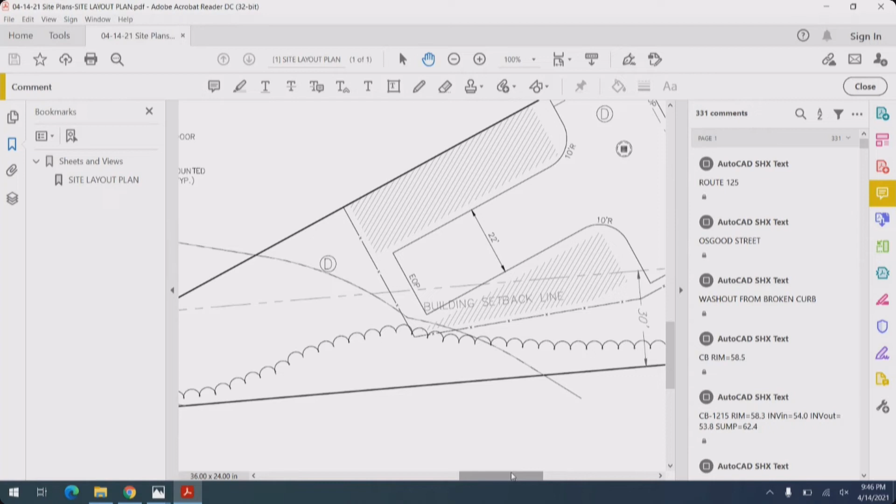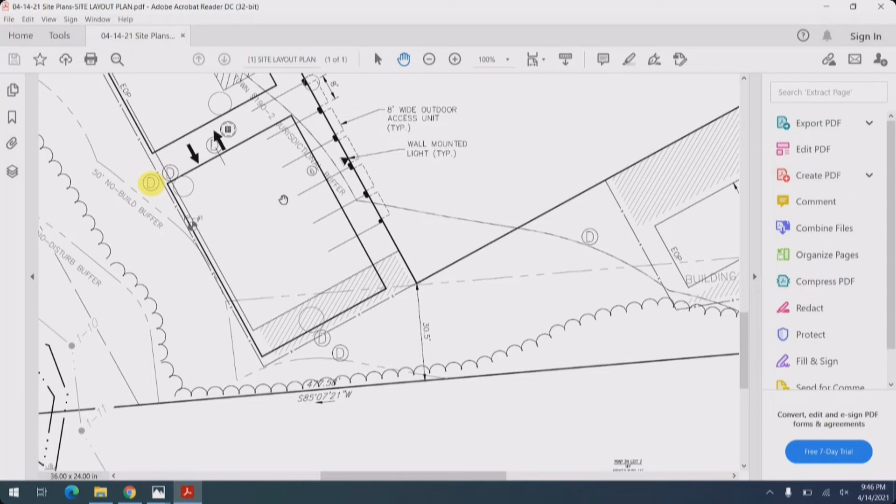So someone hatching out an area that realistically is just unplowable, that's not where the snow's gonna end up, it's gonna bury that drain manhole. So here's another area at the end of this, that's realistic. That one can be plowed lengthwise and pushed to the end. That one's real.

So this drain manhole in a previous plan snuck right into the 50-foot buffer, so this plan shows that it's out. And the riprap velocity reducer for this outlet was just inside the 50, so they moved it out.

And then here's another area of snow storage here, and up here. Can you slide down a little bit again, please? Yep, I'll push the picture up. Yeah, it's realistic. Yeah, that one's okay.

So I can pull up the other plan set if you want. This was just sort of addressing my comments. So there is erosion control proposed, partly silt sock and silt fence, and then partly just silt fence. I mentioned that the commission would probably want both throughout the entire edge of erosion control.

Dewatering, they provided a somewhat generic spec sheet for it. I don't know if you wanted something more site-specific. That could be a condition of the order.

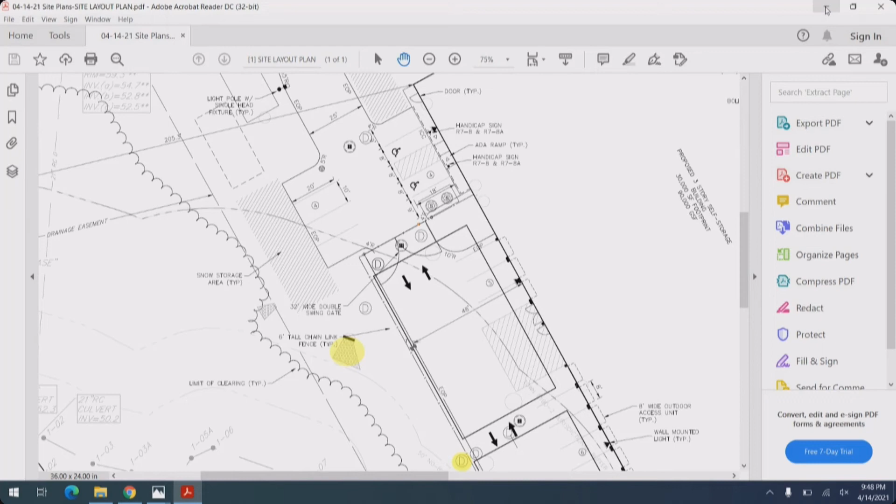If you want me to, I can pull up the plans. Just a dewatering detail, right? Yeah, it's more like a narrative for the contractor. On a plan set, if they're putting a construction set out, that should be just a detail on the plan. Yeah, that's the way it always is, that's what I was reading when you were first starting.

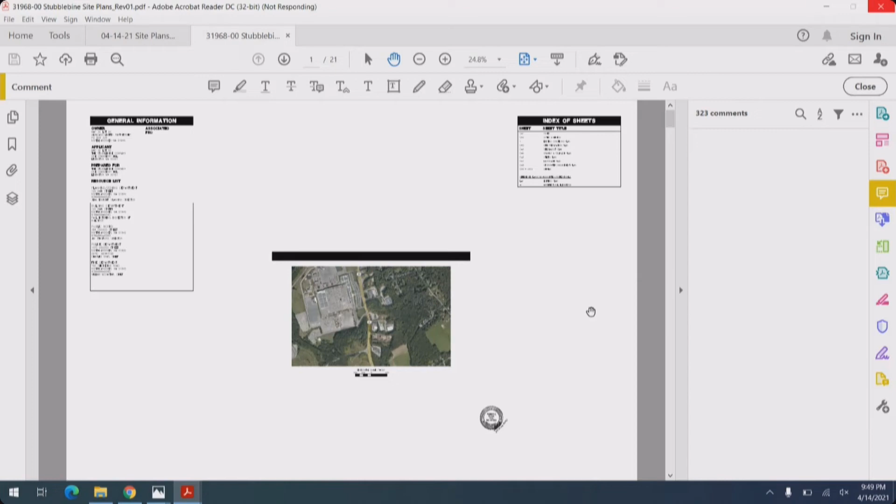So I know Jason Hill is on the call with us, he's the project engineer. This is gonna take a while to download. Hi, can everyone hear me? Yep. It's Jason Hill with TF Moran, project manager, and others are on the line associated with the application. Everything that Amy has gone through tonight is a pretty good outline of where we're at. I have a color site plan that I could present as an overview plan if it would benefit.

If you'd like, I can present that to the commission. Yeah, if you wanna try it, we'll look it up over here. Okay, hold on one second and see if I can get that.

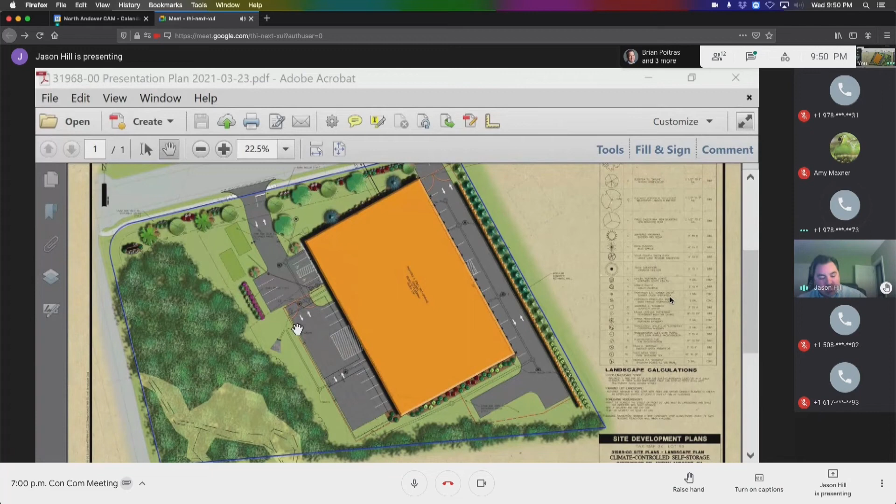I'll be brief. Can you upload it from Zoom? Now, can you see that color rendering? It looks like you can. I can see it, okay. So this is the same site plan, we just colored it to make it more realistic.

We received all the zoning approvals in March for the contiguous buildable area associated with the original tract, got through the ZBA, met with your commission in March, and received some initial feedback related to the third-party reviews and the planning board process, looking for us to solidify the parking reduction waiver or special permit with the planning board so they had a hard plan to approve.

It turns out the special permit for the parking reduction was actually withdrawn without prejudice due to a ruling of the building inspector, because we're providing parking, although it's just behind the security fence, so we had enough parking. It was just a unique condition of the project. Anyways...

The plan we presented to you a month ago hasn't changed, except Amy mentioned the wetlands, and there was a small change in the delineation of the resource area in the southwest quadrant. It didn't have an impact on the proposed impact areas for this project.

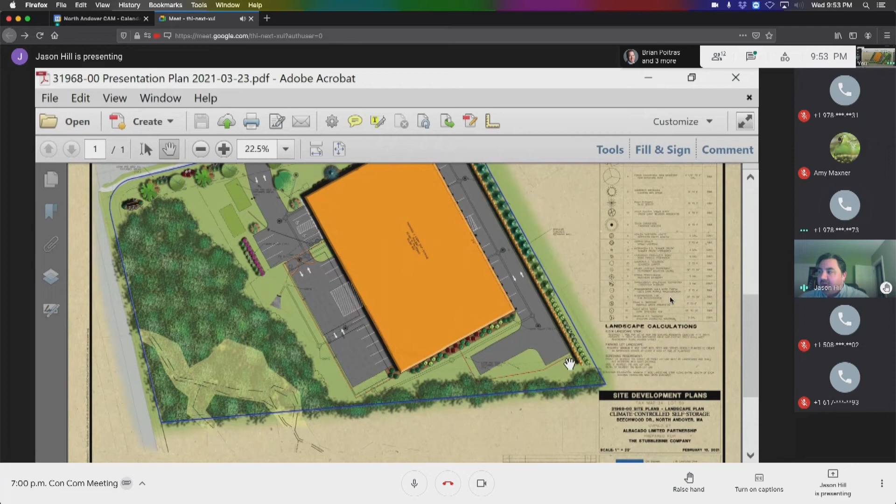Subject to a brief discussion on snow storage areas, we have an opportunity with this perimeter fence. The site has the building, and then a perimeter fence around it with a gate, tying back into the building for security purposes. We could look at pushing the fence out away from the edge of pavement to provide a more adequate snow storage zone in these side areas.

We could make an adjustment to the plan as a condition of your acceptance, so that we would maximize these spaces off of the dead end, allowing snow to be stored in those locations as well.

So that's where we're at, and hopefully it wasn't too redundant, but we're here with any questions. We'd like to get some type of conditional approval if possible so we can proceed to the next steps with our building permits, because the construction season, although it's April, gets away fast. Thank you for the time and your attention to the project.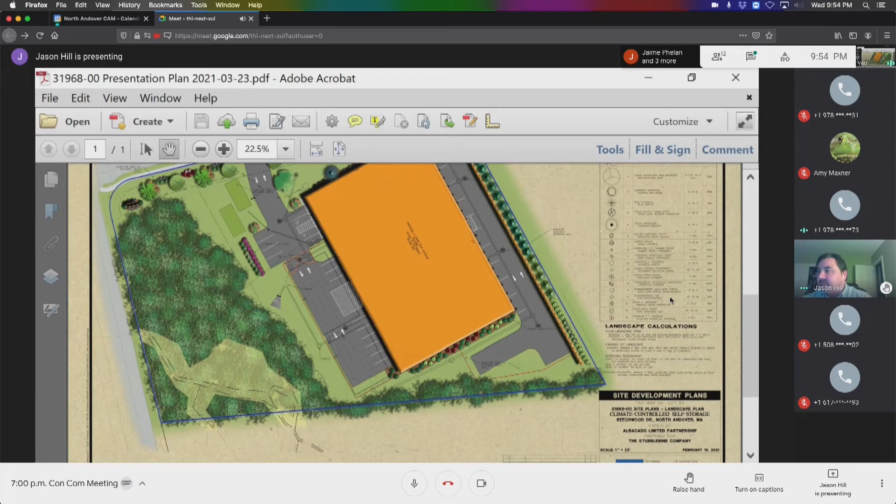Amy, based on Jason's presentation, could you go back to the proposed site plan, specifically to this hammerhead parking driveway area? My question is, once the slide comes up, is that jurisdictional? Is that within the 100-foot buffer?

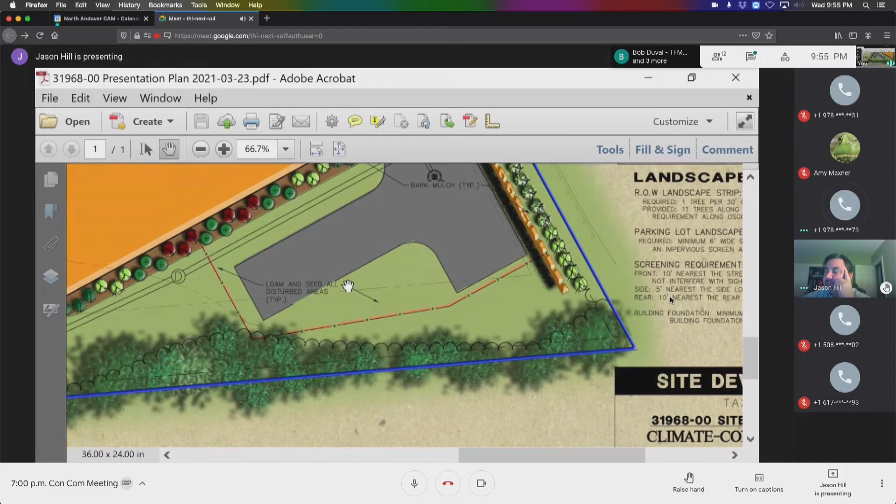Actually, it's out — so we really don't have much of a say where they stockpile snow. Well, this is the 100-foot line. Oh, is it right there? It runs right along there. All right, so because of that, this would be ideal because it would be out of the jurisdictional area.

The only thing I would add, if he's able to move the fence, that makes it more ideal for sure. I would also require that they put up no-snow-stockpiling signs at the end of that area. If we do that — a prohibition, plus give them a place to put it — that's the best we can hope for.

Any other thoughts, guys? No problem. I'm all set if they're able to do that.

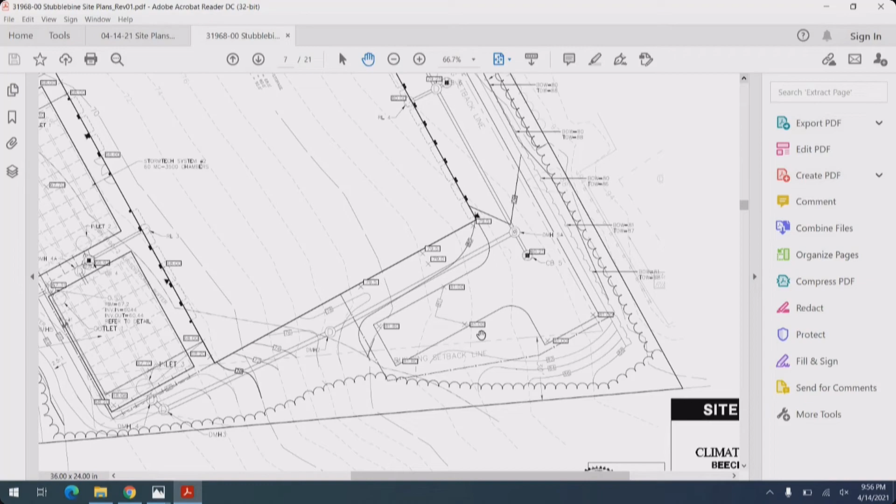So the preferred location is at the end of the long stretch? Yeah, right there. In this corner, got it. Even here, there's room here too, this is sort of good. They could put it there, back it up and push it out, and then the next guy push it across. Maybe the width of the truck, just leave it there. Push it the width of the truck over there. That would be okay, that would be a hell of a lot. That's how I would call it, right.

I have no questions, Al. Are there any waivers requested for this? No, none. Okay, because we were unclear. They made some changes to improve it, so I'll zoom into that.

So the grading got pulled out of the 25. And then this, very probably, the updated plan, all of it's out at the 50. At the 50, yeah. I have no more questions.

Well, the other thing, Amy, like Joe said, the dewatering plan should be on the plan. And cutting into the hill, it's all sand anyway, so the leach should leach good, but there should be some spot for dewatering.

Do you have a draft order prepared? No, I don't. All right, so if we were to continue it and these changes are made and introduced onto the plan, it's the same outcome. We'll render the decision at the next meeting. So I think it's fair game to continue. That's Amy's plan, was it?

Yeah, I move that we continue, unless there's any other comments. No, I'm good, I'm ready to continue. Is the applicant all set with that? So Jason, I don't have a draft decision tonight, so the commission wants to continue to the 28th. Perhaps you can make those changes in the meantime, and I will have a draft decision ready for the 28th, so they can close.

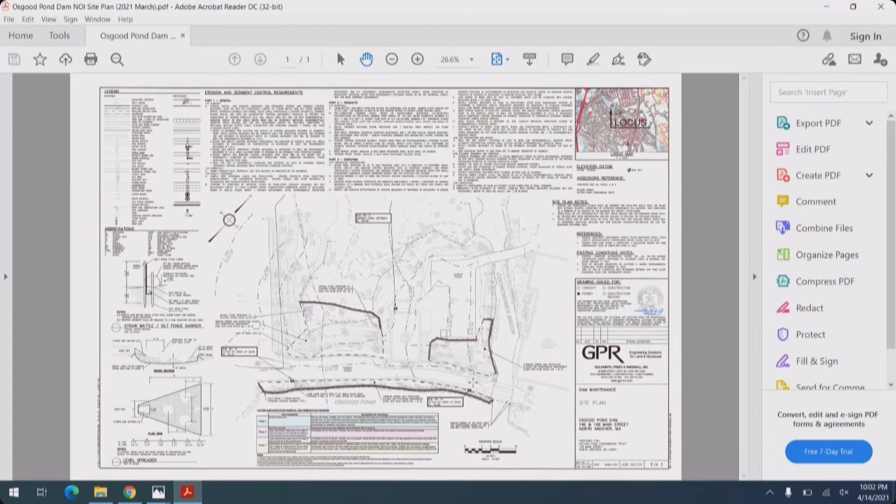Phase 1 is removal of roots of the shrub layer, so there is going to be some earth disturbance. That's your point. We don't know if we're gonna get Phase 1 in our lifetime. Who knows when Phase 1 will come, but Phase 0 is the immediate need to get it to a fair rating.

We need a peer review on this. Absolutely, we absolutely need a peer review. I don't even want to go any further.

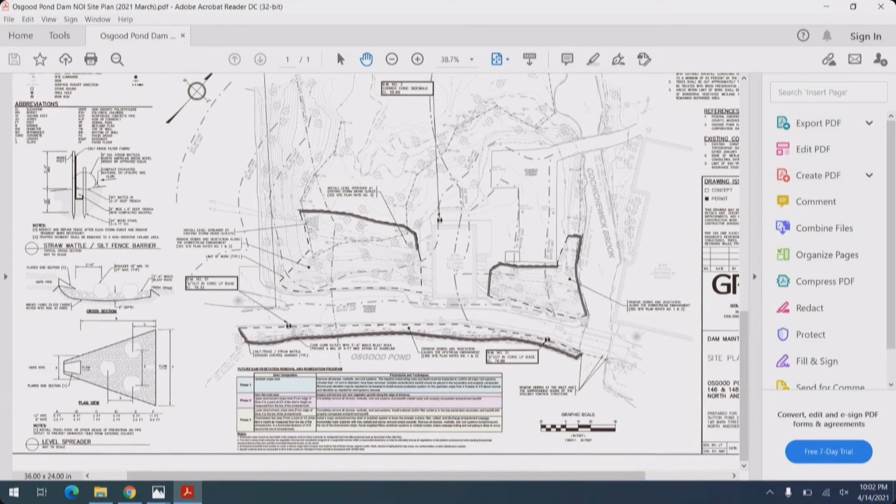I've been banging this drum for 15 years, with everything proposed going across the roadway and the bridge, and I kept saying, it's a dam, it's a dam, it's a dam. Amy, you weren't here. With a lot of people, not the commissioners, but a lot of applicants and others saying it's not. And knowing darn well what it was in its vulnerability, I'm glad to hear the report coming out. It's high time someone finally recognized it for what it is, and, baby steps.

Phase 0 is all we're gonna consider under peer review. Subsequent phases, subsequent applications. I enjoy the comment, the work within the BVW riverfront.

Amy requested an area impact calc, and the engineer responded that they would eliminate that work. I'm sorry, but can you eliminate that work? I don't know. Right, exactly, that's exactly my point.

We need somebody that knows this stuff. And not to put any fear or panic in anybody's mind in town, this dam is no worse than 1,000 other dams across Massachusetts. Yeah, but this is the one we're dealing with, and we've had other applicants come before us looking to treat it as a roadway and wanting to dig it up. No, this is the time right now.

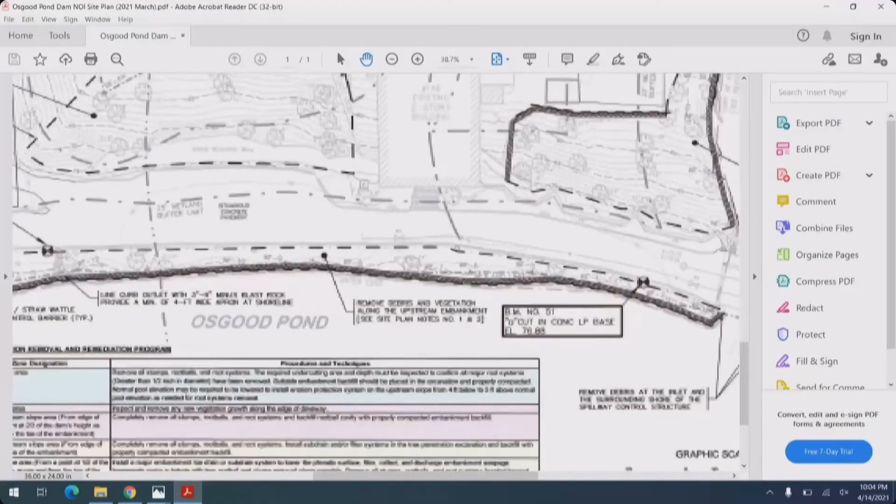We get a third-party peer, and we get somebody to call the balls and strikes for us. I talked to Amy and Taylor at length when she first brought this up. They were gonna clear cut up top, just cut everything down.

I said, what's 40, 50 feet downstream from there, right there, that part of it's riverfront. No explanation, oh, we're not gonna do that now. Well, you were gonna do it before. And the second thing I said to her and Taylor, what did I say? Third-party review, right, because none of us know anything about a dam.

No, I do, and I completely agree, because I know my limitations. This needs to be reviewed by someone competent. I know this engineering firm, I know them to be good engineers, but what I don't know is their capability for dealing with structural dams, particularly in bad condition.

No, it's gotta go out, it's gotta go out. Right, pass it. And when we do, I'll move that we send it up for third-party review. And when they do, I wanna give direction to them on the phases. We gotta have some type of timetable.

We're not doing this over 50 years, are we? No, I don't know. But see, that's something our third-party peer review expert can tell us. We have to get somebody that understands this stuff.

I don't know Horsley and Witten's full capabilities or their portfolio of work. But I know that in my prior employment, I dealt with dams, with the Office of Dam Safety, the 5-year inspection reports and the maintenance reports. I know what it takes, and I know there are very few engineering firms in New England who have the capability of doing this. So it limits our peer reviewers.

Well, let's create a scope of work, put out an RFP, and get it done.

The scope of work tells everybody what they're going to be doing.

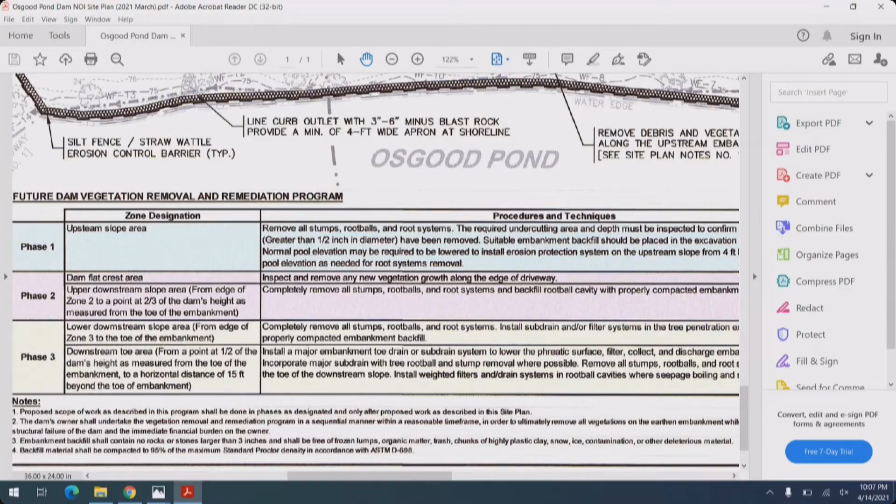It sounds like a lot of the work is earthwork, meaning controlling vegetation and then revegetating with better species. The bridge has to be rebuilt at some point too, correct? Didn't they come for this? Ask us? Again, I don't know, unfortunately, I haven't had a chance to even scratch the surface on this, other than sitting at the table here tonight, so I do ask that...

Hello? Hi, Lamute? Hello? Hi. Hi. Jesus, I'm sorry about that. I'm just trying to get my mic to work.

That's okay. Hi everybody, my name is Lamute Tiv. I'm a project engineer at Goldsmith, Prest and Ringwall, and I thank Amy for the introduction for the project at Osgood Pond Dam.

So there's a lot of information I want to address the board with, and just to give you a background, as Amy mentioned before, this project came about because ODS issued a phase 1 report saying that this is a significant dam in poor condition.

And following that phase 1 report, we were given, or the client was given, a certificate of non-compliance to begin addressing the overgrown vegetation as well as other deficiencies on the dam.

So following ODS instruction, I reached out to the Office of Dam Safety and I spoke with the permitting engineer there. During a conversation, Dave Olet, the permitting engineer, suggested that we begin by starting this, what I'm calling phase 0, what we're proposing on the plan right here, to start the framework so that we can begin getting the dam into a better or more fair condition.

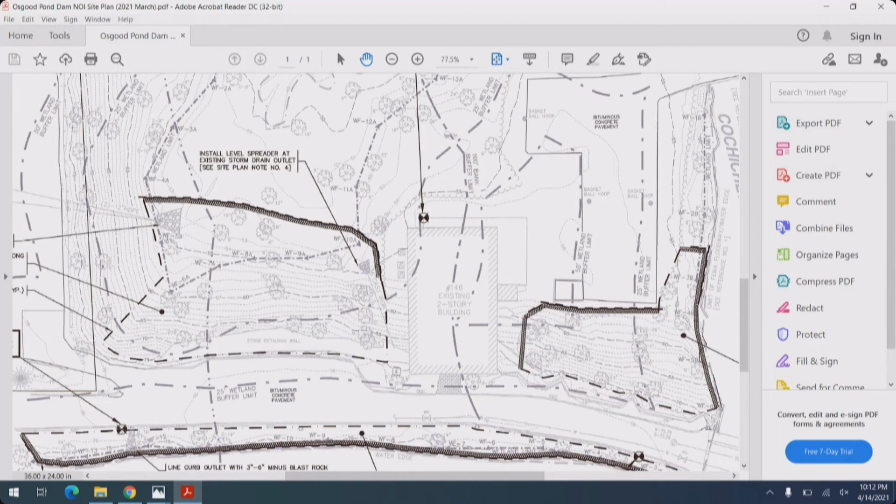In accordance with the Wetlands Protection Act, if we are doing any sort of wetland alteration, we would have to provide wetland replication at a minimum of 1-to-1 basis. So we can certainly provide the area of disturbance, but it is not areas of alteration. That's the second item that I want to address.

And thirdly, again, this is what we're calling phase 0, to do the cleanup as well as the cutting of trees. It is setting up the framework. And I understand that it might be a little bit greedy of us to say that phase 1, 2, and 3 following that can be allowed under the same NOI application. I understand. We can certainly do a new filing every time a new phase is going in.

We're willing to work it out with that. Thanks. Is there anything else that I haven't addressed? And I do apologize, I was just trying to get my mic to work. I wasn't sure it was something that had to be allowed.

So I'm going to try to give my perspective on your response to those 3 or 4 different levels of comments. First and foremost, with regards to third-party review, we routinely do it on far, far less significant projects, regardless of who is overseeing it. We have worked with DEP and various agencies, not just wetlands, but other agencies within DEP's realm who've given bad guidance from an environmental perspective with regards to wetlands.

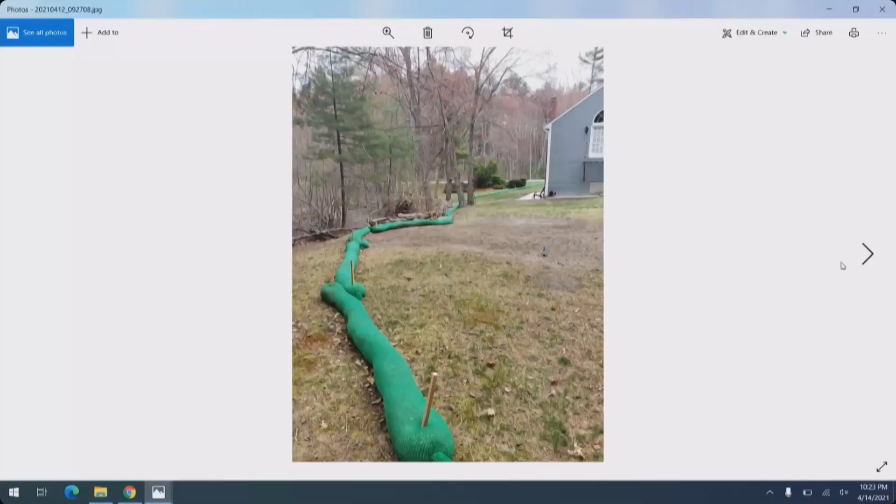Amy: I think you said the walkway was in the 50, it's the 25. Staff: Yeah, so the walkway on the side, you'll see it right here, is most likely in the 25, but we need to get the wetland delineated to confirm.

How old is the house? I don't know, I'll check though. Dunkin' Drive is what, 30 years? Yeah, I'm just looking at how, if the walkway's in the 25, then the house is. But that walkway's new, not a replacement. Meaning the house is within the 50 for sure, the house is definitely inside the 50 if that walkway's in the 25. Right.

So, I mean, I'm just wondering, how did we miss that one? I'll look into it. The house, I bet it's old. Dunkin' Drive's all 30 years. Look at this, that's why I'm asking, there's some houses right on the water. So that's why I'm asking, how old is the house? I don't know, I'll look it up. Okay, thank you.

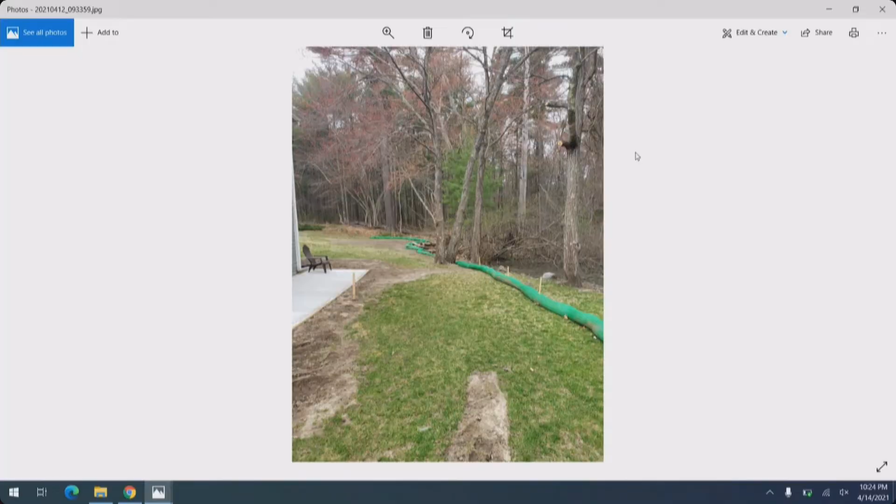We are going to recommend that you issue a formal enforcement order that requires continued cease and desist, getting the wetland delineated, then marking it, and figuring out what's in the 25, what's in the 50, and then what type of after-the-fact application or other enforcement action we need to take. If it means ripping up that concrete walkway because it's in the 25, we don't know, but we have to get that determined first. How far along is construction?

The walkway's in, pretty much complete, but we have decks. The decks are disassembled at this point, still not installed. There hasn't been a demo phase, no ground disturbance back there. So we need a lot more information. Yeah, we do.

Do you have historic photos, satellite photos, time-lapse photos? That would be really helpful. Yep, I love those.

Okay, so cease and desist, get the wetland delineated, and then from there we would figure out what is in violation that would never be permitted, and then what could be permitted, right?

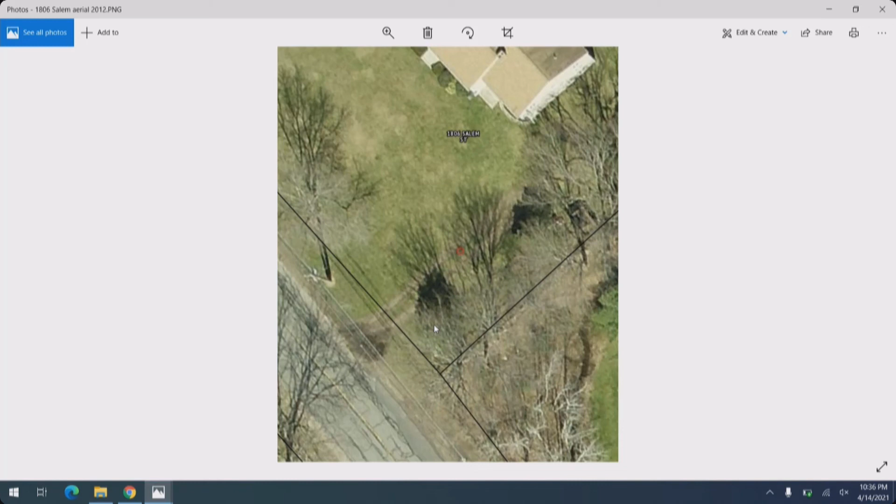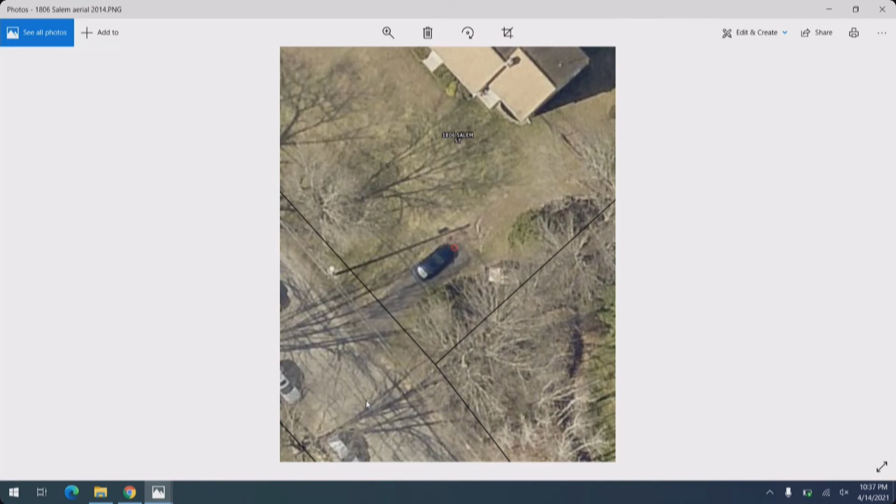Now, I understand Mr. Diamond was not the owner back then, from what I remember. So how we treat that is one thing, but I think the intent is that this was previously lawn area, and it can be restored back to lawn area. That's the guidance he needs - no driveway of any sort. From my perspective, I don't know, maybe you guys want more restored, but if he wants to restore, those are the steps: remove the foreign material and restore it back to lawn.

So, did you get that? First meeting in June - Amy will give you that exact date - but that's when we need you to make the choice and take a particular step in that direction. Okay, all right, I understand. Thank you, thank you, thank you.